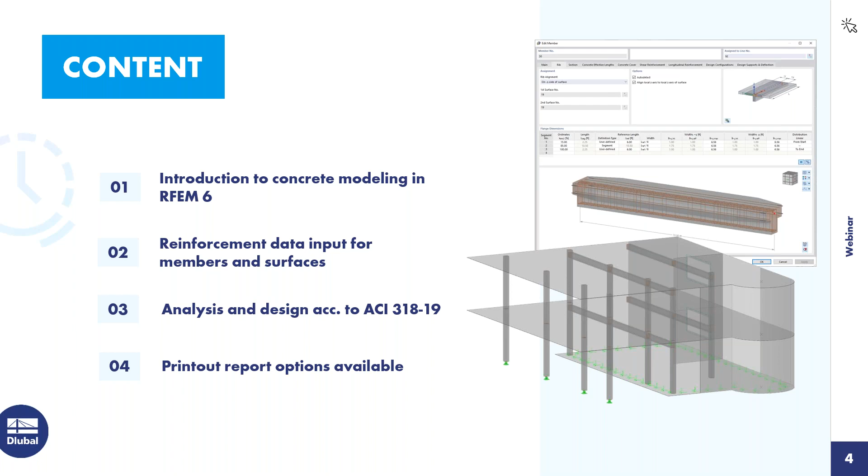As far as the content over the next hour today, we're going to move through a couple of examples, and we'll be working in our new FEA program, RFEM 6, as well as utilizing the concrete design add-on. So I'll give you a quick introduction to concrete modeling within our program. We'll take a look at reinforcement data input for both members and surfaces. We will be running an analysis and of course design according to the ACI 318. And finally, at the end, I'll show you a few printout report options that are available within the new program.

So we'll actually begin immediately within RFEM with our first example. So when we begin a new file, we want to give it a model name. The type of model is set to 3D. On the second tab, you'll notice here are all of our add-ons. So these add-ons would only be available if you've purchased them. And today we'll be focusing on the concrete design. You can see I've activated it here.

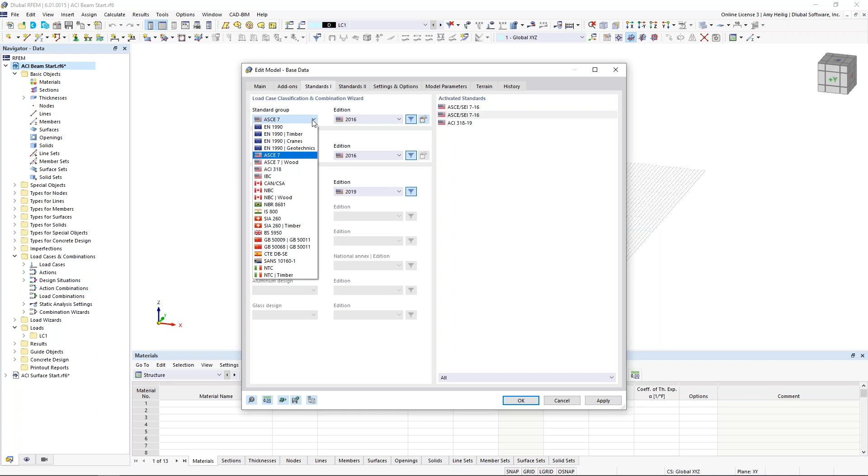Under the third tab, standards, this is where we can select the relevant concrete standards since we've activated that add-on. Today we'll be working with the ACI 318, but you can see here the Canadian standard, the Eurocode, and other international standards are available. As far as our load cases and combinations, we'll be working with the ASCE 7, but of course we can use our drop-down to select a different standard there. And finally, under the settings and options, this is where I can orient my global and local axes. You can see I've set both of these Z axes to upward for the model here.

So once we are done defining this basic information, we are brought into the main program RFEM here. And we want to start off with our drawing grid, which we can right click at the grid down at the bottom to edit this. You can see that I have my grid point spacing set at 1 foot. If you have anything else here, you can either reset it or you can choose this option here, default. That will move it back to 1 foot on spacing.

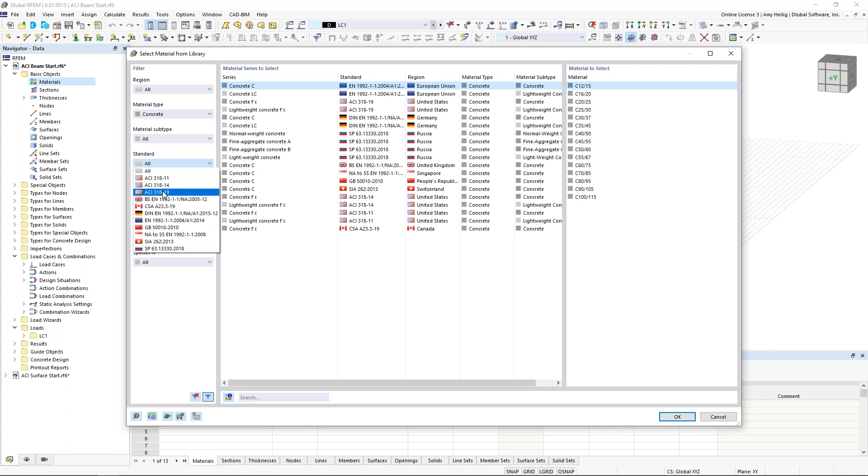We want to begin by defining a new material here. So we will right click within our navigator under the material to create a new material. This will bring open our dialog box within the program. We can then access our material database and we'll take advantage of the filters over here on the left. So you can see within my drop-down, I can choose concrete, I can select the standard ACI 318-19, and from here I can choose my 4000 psi concrete.

Notice on the second tab here with this concrete material, we also have the settings for creep and shrinkage. This comes into play a little bit later on with the serviceability design for long-term deflection if we wanted to consider that. We'll go ahead and leave this unchecked for our example today.

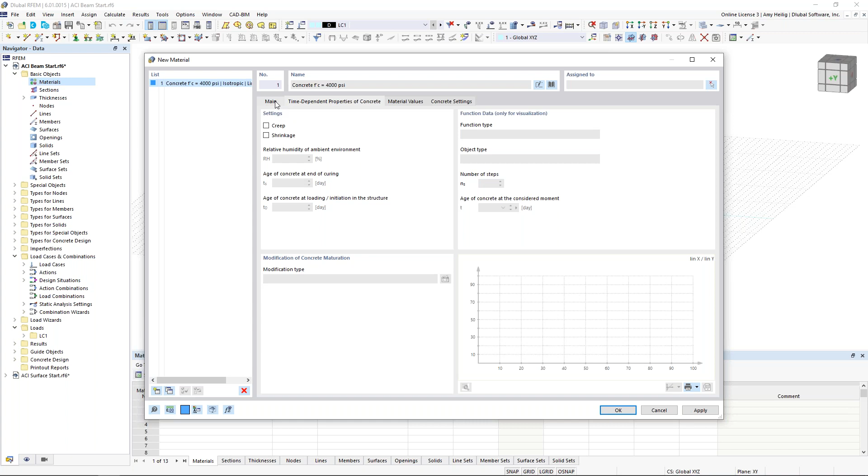Now, while we're still in this dialog box, we want to create a second material. So we once again visit our material database, and over on the left, we use our filters to reinforcing steel. Again, selecting the ACI 318, we can now choose grade 60. So this is a little bit different in RFEM 6 than what we saw previously in RFEM 5, where we do want to go ahead and define that reinforcing material here for our concrete elements. Once those materials are defined, we'll see them over here within the navigator tree. Now we want to do the same thing for our first cross section.

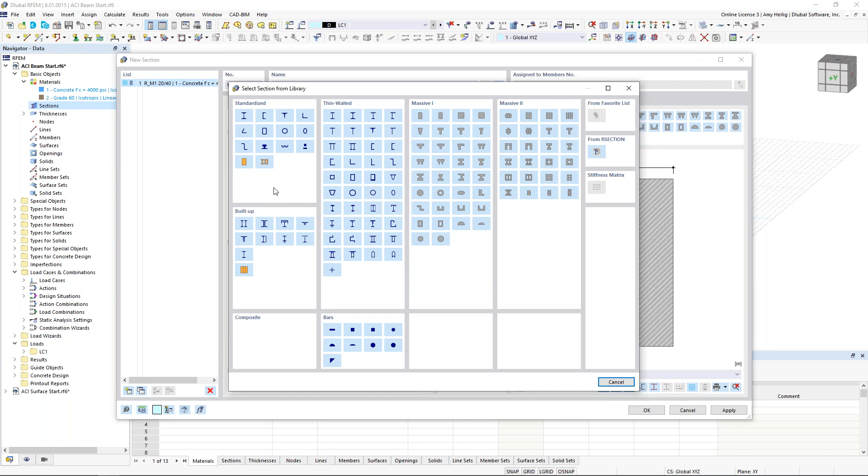So I can right click on the section here, go ahead and choose new section. And we'll see some of the various massive shapes available to us on the right. We can always visit our database here to choose from the library the various thin-walled and massive cross sections. We also have all of the available sections from the steel standards, aluminum, and so on.

But sticking with this basic rectangular section, under the second tab here is where we can go ahead and modify these dimensions at 12 by 18. The third tab will, of course, calculate all of the cross-section properties for us automatically. So we click OK, and now this section is available to us, and we want to begin by drawing our first member. So I can go up here to my toolbar to draw a new single member.

And what you'll see here is the member type is set to beam. Now notice the design properties is automatically checked on here. This is all related to that concrete design add-on that we activated within the base data. When we have this unchecked, notice all of these tabs disappear up here at the top related to our reinforcement. We will only perform an analysis if this option is not checked. But of course, we're also interested in the design portion for our example today. So we'll go ahead and leave this turned on.

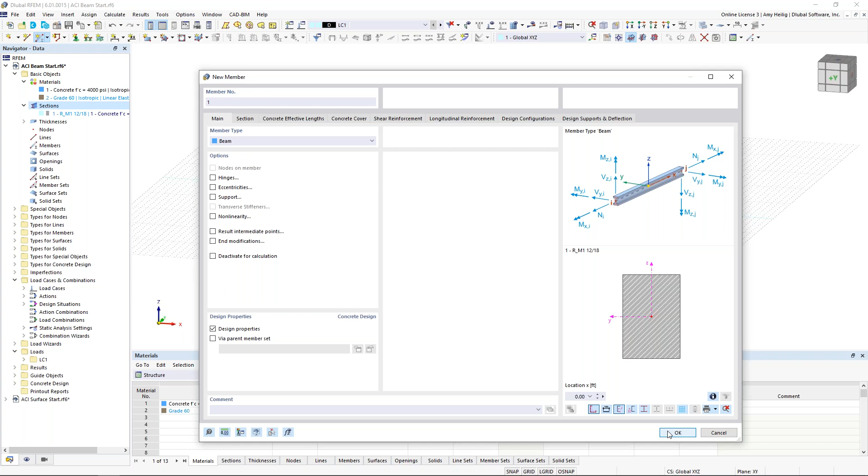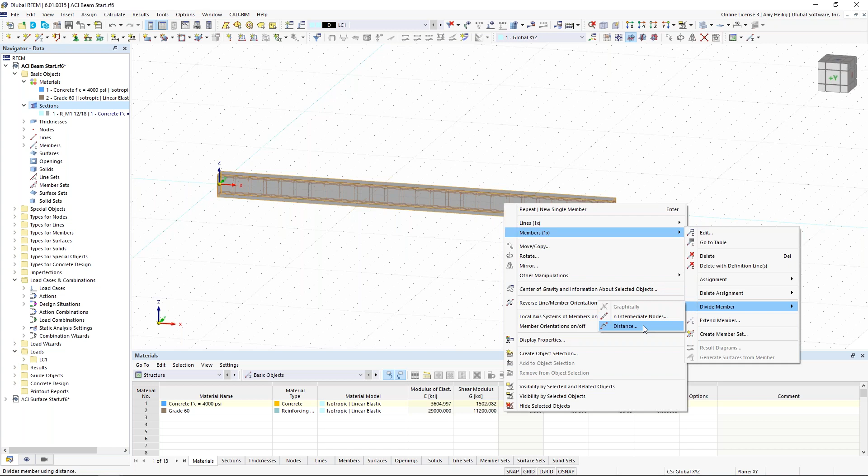We'll get back to some of these various tabs here in just a minute, but starting with the basic geometry here, I'm going to snap from my point 0, 0, 0, and my second point will be at 26, 0, 0. So we have our first beam element shown here. Now I want to add a node along the member length here. So I'll right click on the member, and under members, we have the option here to divide the member by a distance. Within this dialog box, I can tell the program to go ahead and place that intermediate node 20 feet from the member start.

But rather than dividing the member itself, I can choose this option down here to actually create the node without dividing it. So it will remain one continuous segment. I click OK. I can turn this into wireframe view, maybe turn off my grid. I can zoom in here and you'll see this node added along the member length.

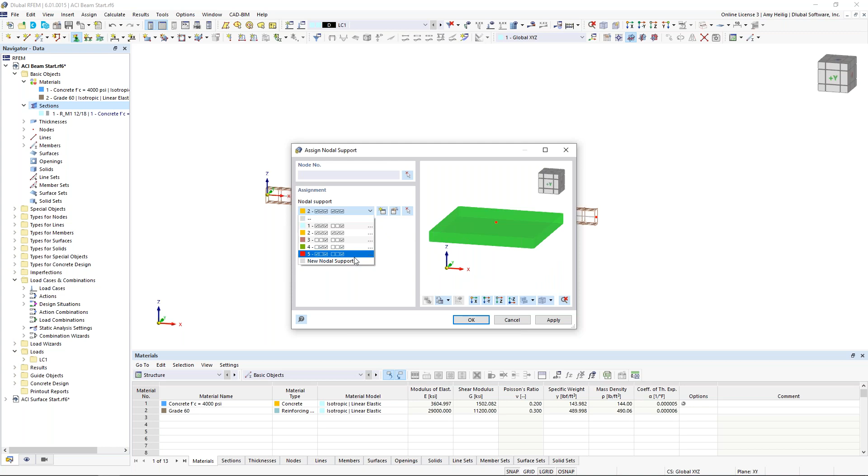So let us continue on by supporting this simple beam. So we'll go up to draw a new nodal support. And we have some default options within the program here, such as a typical pin support, maybe a typical rigid. We can also create a new support definition. So within this dialog box, we have our 6 degrees of freedom, 3 in translation, 3 in rotation. Now we also have partial fixity. So if we have something that's not fully fixed, not fully released, we can go ahead and define that spring constant there. And lastly, because RFEM is a nonlinear program, we can define these geometric nonlinearities for the nodal supports within our third drop-down box here.

For our first nodal support, we want to restrain the rotation about the global x-axis, which I can see back here in the background. I click OK for that first definition type, and then I can graphically select my node here, node number 1. Now notice I'm still within this dialog box. I can click Apply, and I can create a new nodal definition once more. This time we're going to release the translation in the global x direction for a roller. I click OK. I can graphically select my intermediate node here, and I click OK once again, and now our nodal supports are shown here at both these nodes.

Now, something new that we've added within RFEM 6, you can always right-click at one of these nodes and take advantage of this slider option to increase or decrease the size of those nodal supports.

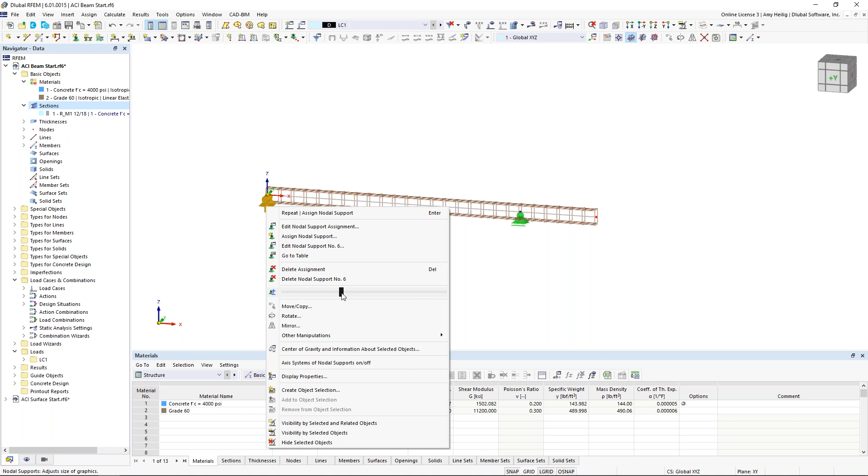Okay, so now that we have the basic geometry defined, let us move on to loading. Now notice the program has already created one default load case here. So if we go into this option, Edit Active Load Case, we can go ahead and rename the load case Dead. Now the self-weight is automatically activated here. The action category is set according to the ASCE 7 to dead load. So for our second load case, we will create this as Live 1. The action category will be set to live. The self-weight will be automatically unchecked here because we don't want to account for it twice.

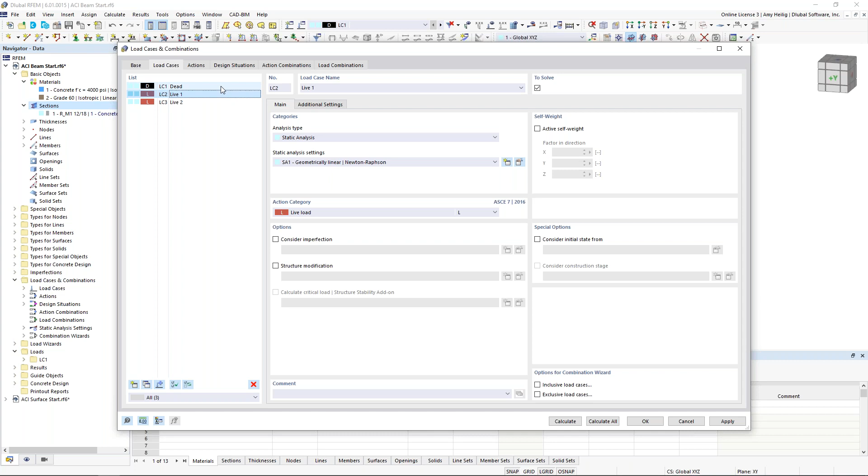And finally, for my third load case, I will make a copy and we'll just simply rename this one Live 2. So now that all 3 of our load cases are defined, I want to take a step back here under the first tab, Base. We will generate those load combinations automatically according to the ASCE 7.

Remember, this is what we set under our base data, but we can go ahead and make a change to a different standard here. I also like to activate this option, the combination names according to the action category. Under the actions, we have both dead load and live load defined. Because we have 2 live loads under our load cases, we need to tell the program how to combine these within the load combinations, whether that's together or separately or alternatively. So we can choose those options from the drop-down box here.

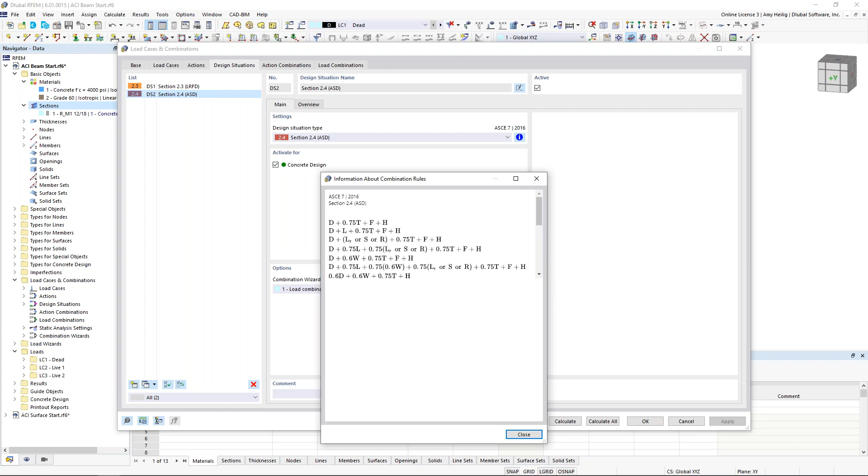Then we have our design situations, and this is new within RFEM 6. So we have 2 design situations created, and these will be used for our concrete design. Notice we have LRFD for our factored load combinations and ASD for our unfactored load combinations. Both of them are active here for the concrete design add-on. Now, if we're curious to see what these load combinations look like, referencing the standard, we can click on this little info button here, and now we can see all of the load combinations in detail.

But there's something that we need to also take care of within this combination wizard here that's important for concrete design. And for our factored load combinations, which will eventually be used for our strength limit state design, we know that we need to apply this I crack factor that comes directly from the standard to reduce the stiffness. And that's all done here within the combination wizard. So I can go to the edit settings here. And notice the static analysis settings is set to a second order analysis with P-delta considered, which is great. That's exactly what we're going to be utilizing today.

But we also want to turn on this option down here to consider the structure modification. Now I need to create a new structure modification. I'll activate this for members since I only have one member in my simple model. And within my tab that appears here, I need to use the drop-down box to create a new member stiffness modification. And sure enough, within this drop-down box, we see here the ACI 318 Table 6.6.3.1.1(a) listed. This is just going to reference the code to give you the I crack factors for the various component types here. And for today, we obviously have a beam. So the I crack factor of 0.35 will be applied to the bending stiffness here.

So I can click OK here, and then I'm going to want to either type in my member number or I can graphically select it. I click OK, and now for my factored load combinations, the I crack factor will automatically be considered. But when we're talking about our unfactored load combinations for serviceability design, we do not want to apply that I crack factor stiffness reduction. Rather, what we reference here from the code is the effective moment of inertia, I sub e, from Table 24.2.3.5. So we actually need to deactivate that I crack factor here.

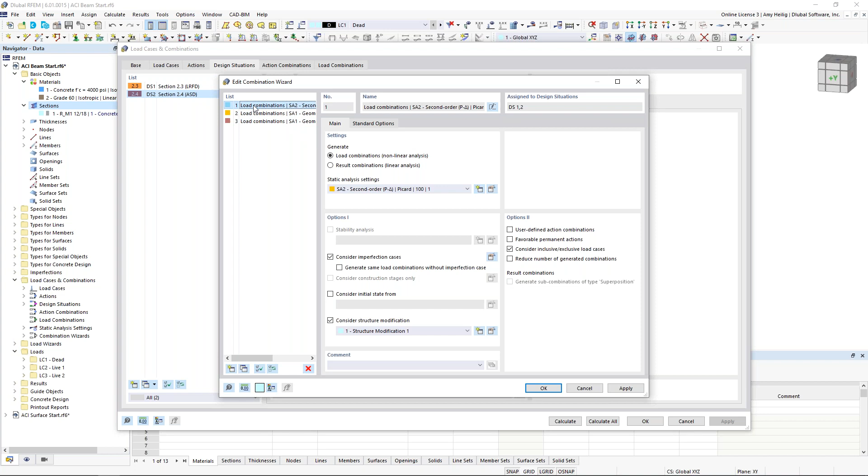Well, that's easy enough. If I go into my combination wizards and create a new definition here. So previously for my factored load combinations, I was using item number 1 here with my structure modifications active. Now for my third one that I just created, we want to choose a second order analysis according to P-delta, but I will actually leave this turned off. The concrete design add-on will go ahead and determine the effective moment of inertia I sub e for deflection calculations automatically. So nothing needs to be done here with serviceability or deflections for the ASD design situation. We just simply need to deactivate those settings here under that third definition.

So now under the load combinations, we can see here our factored load combinations in orange, and notice the structure modification, that I crack factor, is applied to these. Our unfactored load combinations here in red, this setting is turned off.

So now that we have defined the load cases and combinations, we need to actually apply the load to the member. So we'll start off with a new member load within our toolbar here. The program asks us which load case to place this member load under. We'll choose dead load. And up pops our dialog box where we can simply define the load magnitude of negative 1.0 kip per foot.

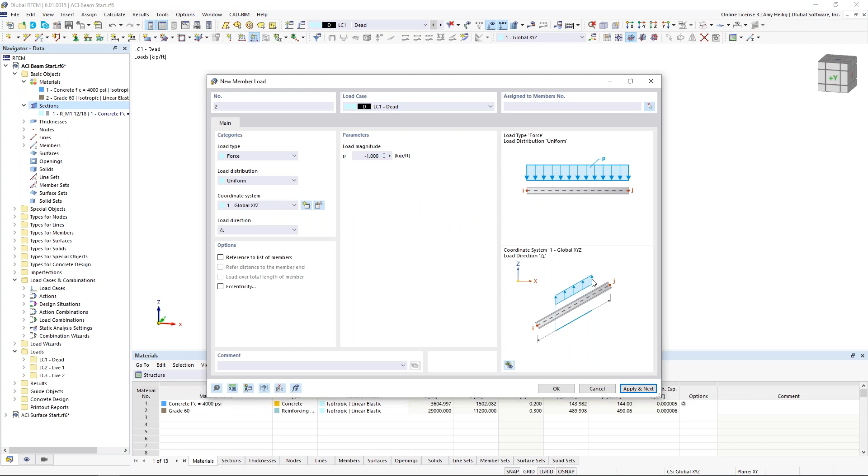And this will be applied along the full length of the member. I can graphically choose this member or type in member number 1. I hit apply and next, and notice in the background that load was applied, but I'm still within this dialog box.

What this allows me to do then is to drop down to load case number 2. I'm going to change the load distribution here to trapezoidal, and adjust my load magnitude at the start to negative 0.2. The end will also be negative 0.2, but I want to make sure to apply this only from point 0 to 20 feet on my beam. I type in member number 1, apply and next, and in the background we should see that live load applied only between our 2 nodal supports.

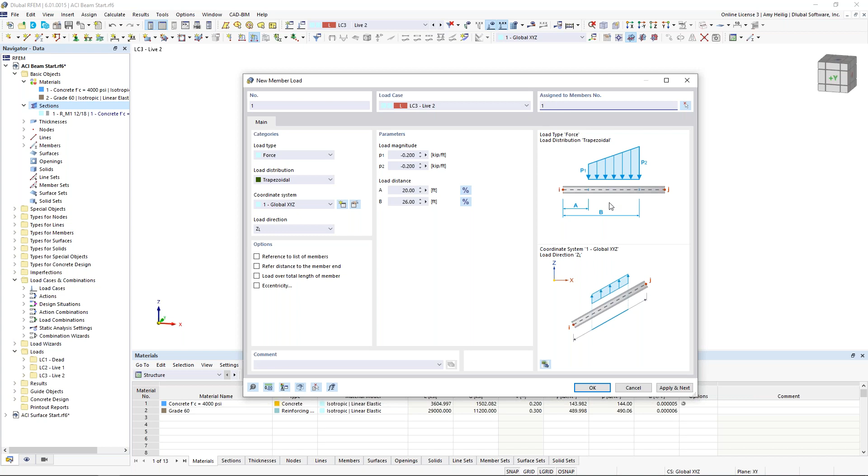Finally, we want to do the same thing with load case number 3. We're going to leave the load magnitude the same, but adjust this to 20 feet and then to 26 feet. We go ahead and hit member number 1 here on our keyboard, click OK, and now we should see that additional live load defined. Now within my drop-down box, I have the ability to cycle through these different load cases and combinations to view the loads applied to my beam, also including the load factors from ASCE 7.

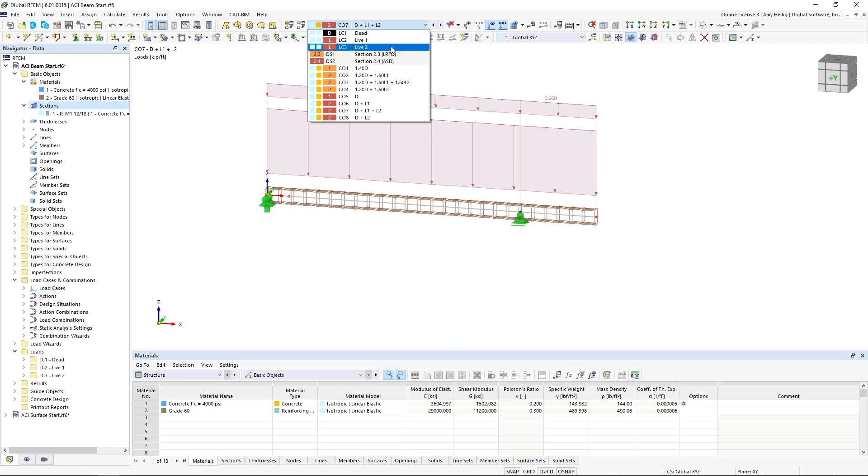Okay, so what we can do now is to choose this LRFD design situation, and I can run a quick analysis. Remember, I haven't modified my reinforcement yet, so I'm not really doing the design according to the ACI yet. The program put in some default reinforcement to begin with. But looking at just these static analysis results, notice we have a new tab here within our navigator, and it's grayed out because it's the only thing we've solved for, but it says static analysis.

Now we're probably not so interested in the global deformations for these factored load combinations, but what we can take a look at are topics like internal forces. You can think of these design situations as an envelope solution. It's going to group together all of those factored load combinations, and what you'll see here are 2 different values for all of my internal forces.

These 2 different values just refer to the envelope values. Currently I'm viewing both the max and min, but I can set this to only the max or only the min, and we'll see that adjust graphically. We also can display the support reactions. Again, these are just the internal forces. This is probably what we'd want to use to do our design according to the ACI.

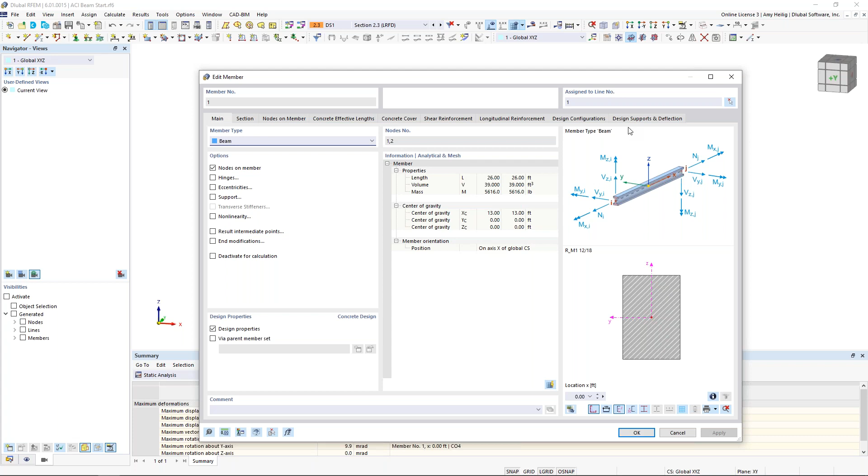So moving on to that topic, let us double click on this member to explore these other tabs located at the top for our reinforcement definition. The first tab is the concrete effective lengths. I'm not going to touch anything within this tab. The reason why is because when we do not do anything within this tab, it is going to design the member according to a P-delta analysis. That is one of the approved methods within the ACI standard.

Now, alternatively, if I do define an effective length within this drop-down box, it will design according to the moment magnification method. Again, this is also from Chapter 6, an approved method. But we'll go ahead and design according to P-delta today. Therefore, under our concrete cover, we can leave this as 1.5 inches, which is default here.

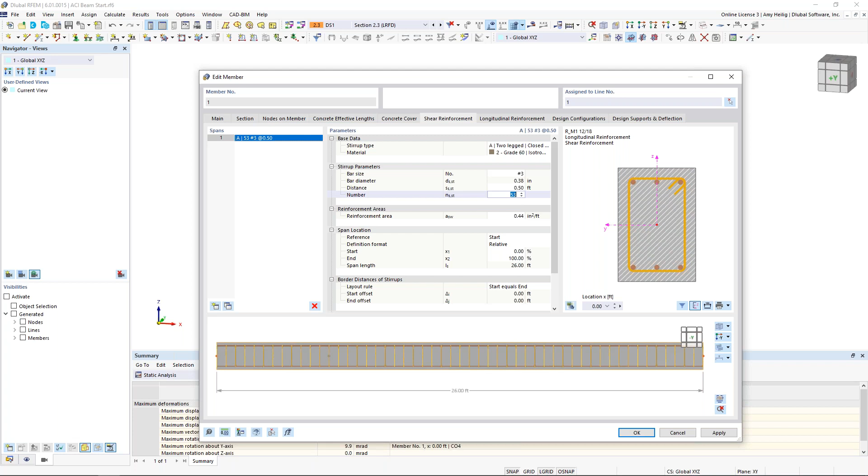Our shear reinforcement allows me to define different zones if I want along the member length. So notice I can create these different zones here and adjust my shear reinforcement as needed. Now, for our example today, we'll go ahead and utilize these number 3s, but I'm going to modify my spacing at 0.5 feet, or every 6 inches. Notice this picture down here automatically updates with my shear reinforcement. Now this is applied along the full member length.

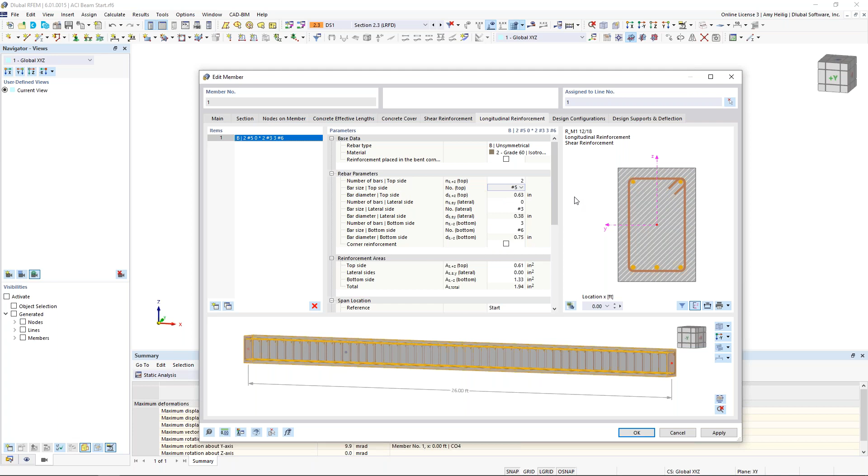Under my longitudinal reinforcement, this is where I'm going to set the longitudinal reinforcement as shown over here in this graphic, this cross section. I can use my drop-down box to choose unsymmetrical. This option now gives me the ability to define 2 number 5 bars at the top of my beam. We can see that picture update here. Along the sides, I'd like to define 1 number 4. Again, seeing those lateral bars here, go ahead and update in the picture.

And then finally, we want to update the bottom. We'll go ahead and choose 5 number 5s from the drop-down box here, and we see those 5 number 5s shown within the cross section. This is going to be applied along the full length of the member here.

What else we can do is define a little bit more information, such as reinforcement offset, but also anchorage type at the start and member end. This is all going to come into play for our development length design checks within the ACI, so we can make adjustments there. For now, I'll just leave this as empty.

Now, we of course have some additional positive bending moment in between these 2 supports. So perhaps this reinforcement isn't completely adequate, and we'd like to add some additional bottom reinforcement only at this location. So what we can do here is create a new item.

Up at the top, I'm going to choose from the drop-down box the option D line, then choose 4 number 6s. Then I want to adjust my offset distance, which is all measured directly from the stirrup. We can modify this at 0 and 1.7. And then for the right-hand side of this line reinforcement, it will be 0 and 1.7 again.

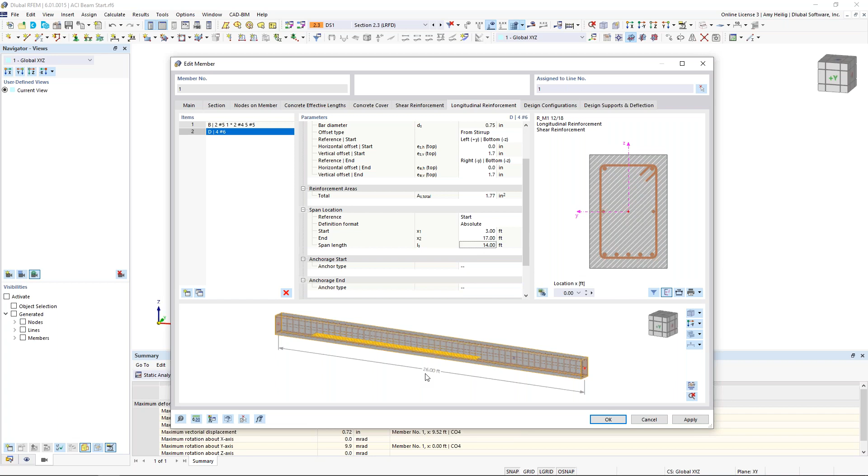Okay, so now we see that additional reinforcement, but right now it's shown along the entire length of the member. I'm going to modify this to begin at 3 feet and end at 17 feet. Now we can see the reinforcement shown here, which will coincide in between the two nodal supports.

Now, similarly, we probably have a negative bending moment over this intermediate support here and into the cantilever portion. So we'd like to add some additional reinforcement for the top of our member. Let us once again define here the option D for line, and we're going to choose here 2 number 5s.

Now, for this option with our offset distance, we want to use the drop-down box here to choose center, top, positive Z. Then I'm going to modify my offset distance to negative 1.2 and 0. I'll choose the same option, center, top, positive Z, and this is going to be 1.2 and 0. So now we can see that additional reinforcement at the top shown here.

Now we don't want to run this along the entire member length. Rather, we are going to choose a distance here of 17 feet to 25.5. Now we have the additional top reinforcement defined over that intermediate support. So that will be all that's needed for this particular tab.

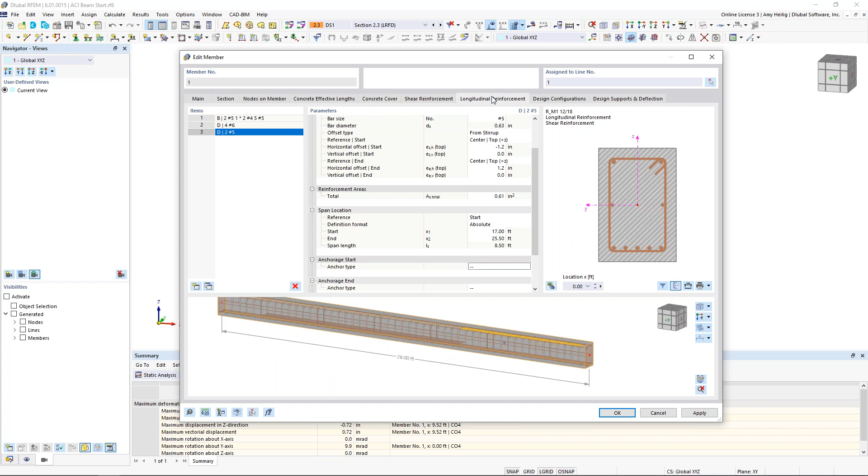So we'll move on to design configuration. We have strength configuration and serviceability, both of which come with a default option. We can go ahead and edit the settings for this default.

What you're going to see here are just the various options specifically for the ACI on what we can turn on and off for the strength limit state. For example, we're going to see strength reduction factors, some minimums and maximums to consider directly from the standard. Now the stability tab here is related to the moment magnification method. We're not running that for today, so nothing to take care of here.

As far as the serviceability configurations, if we take a look at this, you'll notice initially we're going to be checking the crack analysis. So this is going to allow us to take into consideration section 24.3.2 from the ACI to make sure that our spacing of our longitudinal reinforcement meets the code requirements.

Now, additionally, we can turn on the direct crack width calculation. This is a bit more of a theoretical approach; it will utilize the Gergely-Lutz equation to calculate the crack width. We can compare this to the reasonable crack widths set forth by the ACI PRC 224. Directly from that standard, we have some different options here that allow us to choose our limiting crack width. For example, dry air protective membrane, we can set this to 0.016 inches.

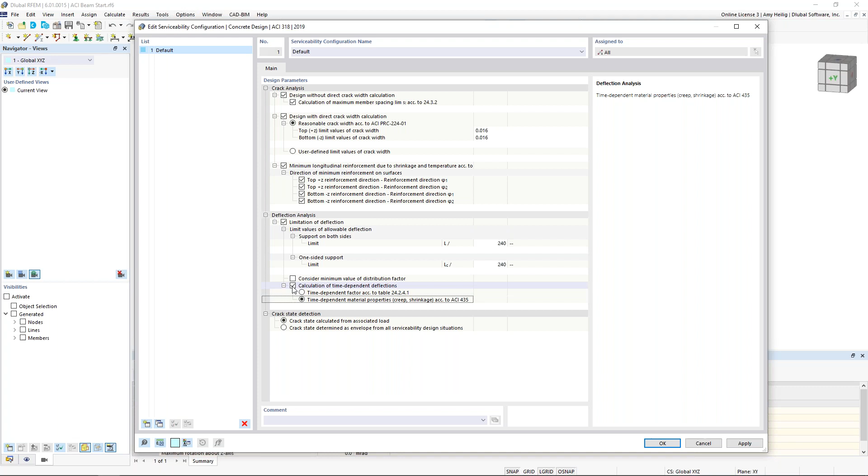Alternatively, we can consider creep and shrinkage here according to ACI 435. Remember, I showed you the material properties themselves allow you to define those creep and shrinkage properties. We'll go ahead and turn that off for today. We won't be considering long-term deflection, and we are done with the configurations here.

Now, the final tab is related to our design supports, and this is important for two different reasons. The first we'll start with is deflections. The program doesn't know which portion is supported on both ends and which end is a cantilever. So by defining these design supports, that gives the program the intelligence to recognize which limiting deflection ratio to compare the different segments to.

What we'll begin with is a new design support at the left-hand side. So I create this new design support. You'll notice the type is set to concrete. We give it a support width of 16 inches. The support depth is just set to the width of the member. We have a nice picture over here on the right-hand side, just referencing what some of these settings are.

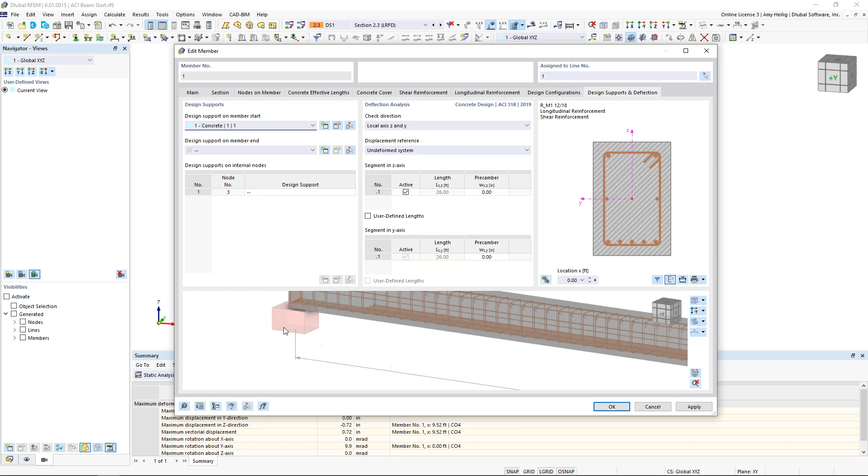Now we also have the ability here to reduce the moment, so we can set this factor for moment redistribution over this support width. This is all related to ACI section 6.6.5. So when we create that support width, we can automatically see it set here on the first node of our beam.

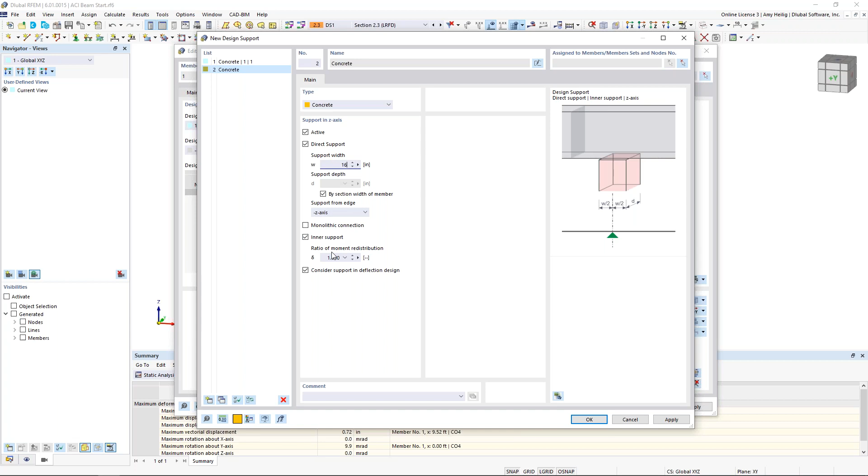Now we also want to set that design support on the intermediate node along the member length. We can do so here at node number 3 by either selecting the support we already defined, or we can create a new definition. This one will also be 16 inches in width, but I want to set my ratio here, maybe 0.75. I click OK, and now we can see that nice design support shown here.

So now the program will have the intelligence to recognize this is a cantilever portion out here on the right, and this portion here is supported on both sides. Now, if you do not set any design supports within this tab at all, the program automatically defaults to a support at the member start and the member end internally.

Now, these design supports are also important for a second reason, and this comes down to strength design when we're talking about topics like taking the shear internal force a distance d away from the support face. Well, this will all be considered now with these design supports that we've defined. Otherwise, the program only knows the intelligence of taking the shear force, for example, a distance d away from the member start.

The information over here on the right is just related to the serviceability deflection checks. We can add in a pre-camber. We want to tell the program what is the reference length for our limiting deflection ratios, and that will sum up this particular tab here.

Okay, so now that we have finished all of these various settings, notice that the program has automatically updated my reinforcement. We can see those design supports shown here, and we can now move on to the design utilizing the concrete add-on. So within my table down at the bottom, I'm going to activate the concrete design here. This is available because I have set this under the base data to turn on that concrete design add-on.

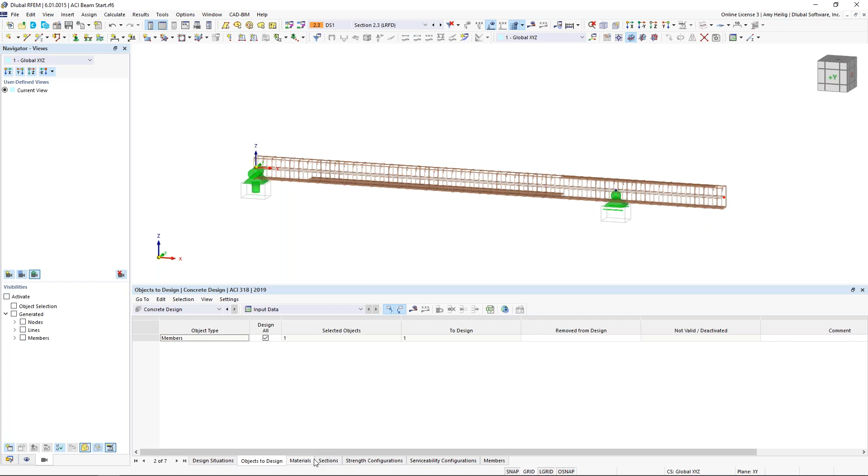Now the objects to design, we can see here we only have one element in the model, of course. The rest of these tabs are really just repetitive. It tells us our materials, our sections, so nothing to really do here. So we can begin by running our calculation directly within this table.

Now notice that the program will run through our load combinations here, and it's also running through the design portion. It solves pretty quickly, and we can see now we are presented with our results. So we're still within this concrete design add-on, and now within the drop-down box, I can look at my design ratios on my members. And here they are grouped together quite nice, showing the strength design, the serviceability, the reinforcing limits, and the detailing of the reinforcement.

All of the design ratios here are green. That's always a good sign rather than seeing red, which means we're over the design ratio of 1.0. We can also utilize these filters up here at the top. If we wanted to view maybe only the max ratio, we can select the max here. Otherwise, all of them will be shown. Now notice as I click through this, the big red arrow showing in this graphical interface here will determine where my controlling internal force is.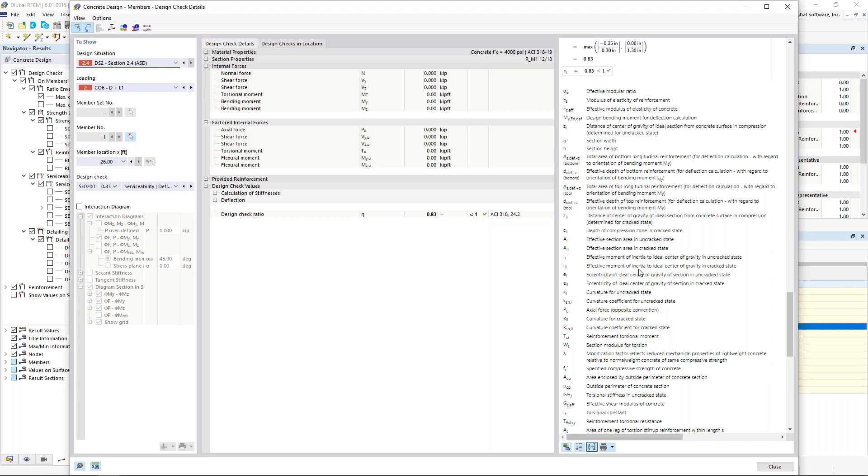The other new thing within RFEM 6, for any one of these design ratio checks, what I can do here is to visit my design check details. So this is going to launch this dialog box that is going to show all of my code equations here. So notice this one is pretty long and complex, but we show every single equation. Down at the bottom, we're going to give you every variable definition. We're also giving you all of the code references along the side as well.

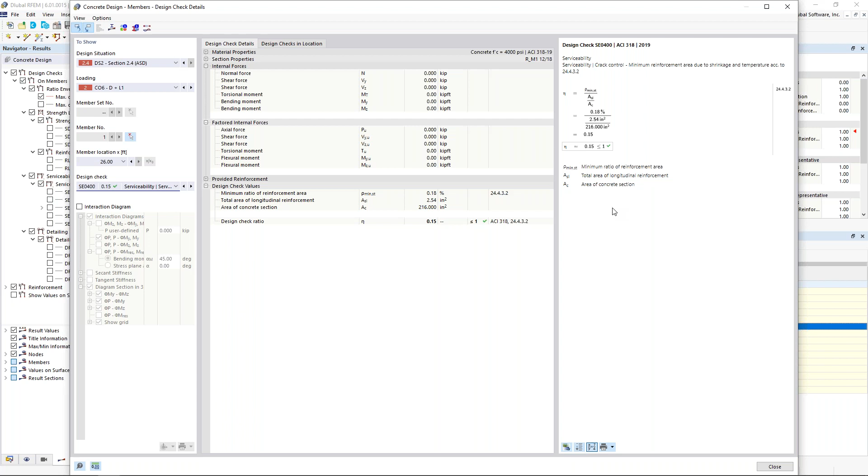So we can use any one of these checks here. Currently, we're looking at serviceability. We can take a look at any one of these other checks to determine the ratio here for our other various serviceability checks. Now, alternatively, we can take a look at any one of the strength design checks as well. Same concept. We're going to see all of those variables listed again with all of the code references.

What else is pretty powerful is we can view the diagram in section. And this is showing me which portions of this concrete section here are in compression, which are in tension, and we're also giving you the stresses for each of the rebar here. So this information is all available to us, of course, in our table format, but now we have this new drop down here for concrete design. And we can see if we collapse these trees that we have two options here, the design checks or the reinforcement. So let us take a look at the design checks first.

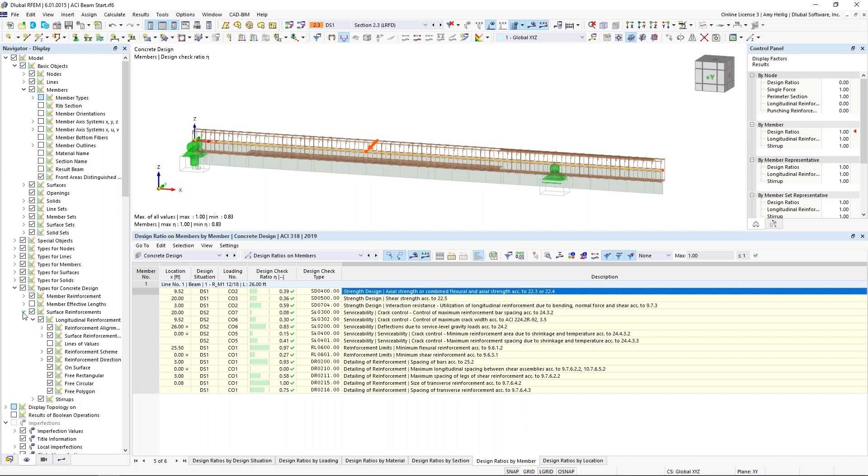Also, I can turn off my reinforcement on my member by visiting my navigator display options. And here we'll see types for concrete design, and I can turn off my member reinforcement. So going back to my member design check results here, I can turn off maybe the max ratio and turn on any of the various checks related to my color coding here, which all relate back to the table design ratios.

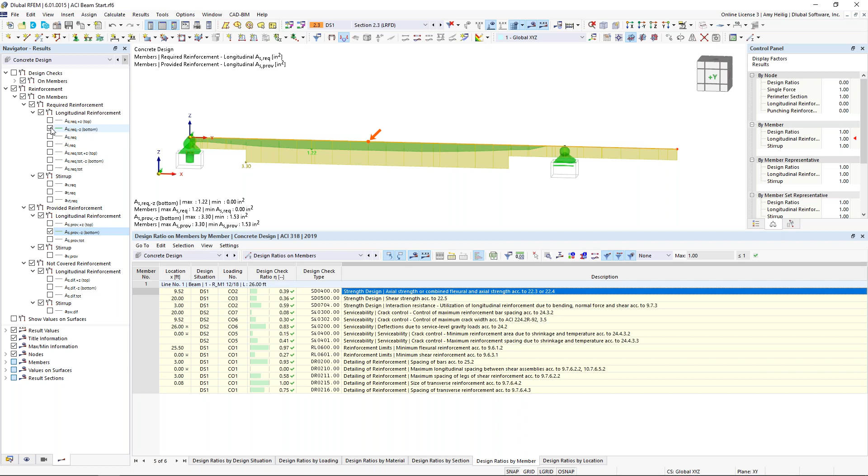Now, in addition to viewing the design checks, we also can take a look at the reinforcement along the member. And what I mean by this is we can view the required reinforcement at the bottom of the member. This is strictly from the analysis. Well, on top of this, what we can do is to overlay the provided reinforcement on the bottom. So what we would always hope to see, of course, is that the provided reinforcement is greater than the required reinforcement.

And in a similar fashion, we can turn on the required reinforcement for the top, which makes sense. We see it over here along the support and into the cantilever. What we can do is to overlay the provided reinforcement at the top. And again, this is greater than the required. So some various options there in terms of how to graphically view these concrete design results, both in table format as well as within the graphical options.

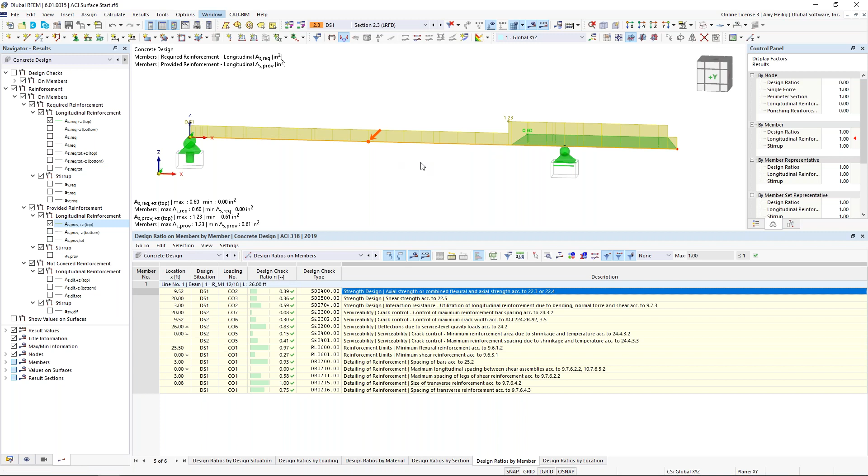So that will go ahead and wrap up our first example here. I wanted to give you an introduction to just a simple beam design. For our second example, let us move into a little bit more of a complex structure. So now we have an entire building here. We have columns, beams, walls, and slabs all defined with reinforced concrete. Now, the first thing is I've already set up the load combinations, taking care of a lot of this information that we just did with example 1. Let us go into our design situations that we already covered.

So again, we have LRFD and ASD, and as we mentioned before, we need to set those I crack factors for our factored load combinations for the strength design. Well, I went ahead and did so. I just want to show you guys how this differs a little bit when looking at the structure modification here.

Now you'll notice I've activated both members and surfaces. We have two tabs up at the top, and I have set the I crack factor for my columns. I've selected all of the column members here. I also see my beams, and I've selected all my beam members. And under my surfaces, we have set the I crack factor according to the ACI for walls uncracked and flat plates and flat slabs.

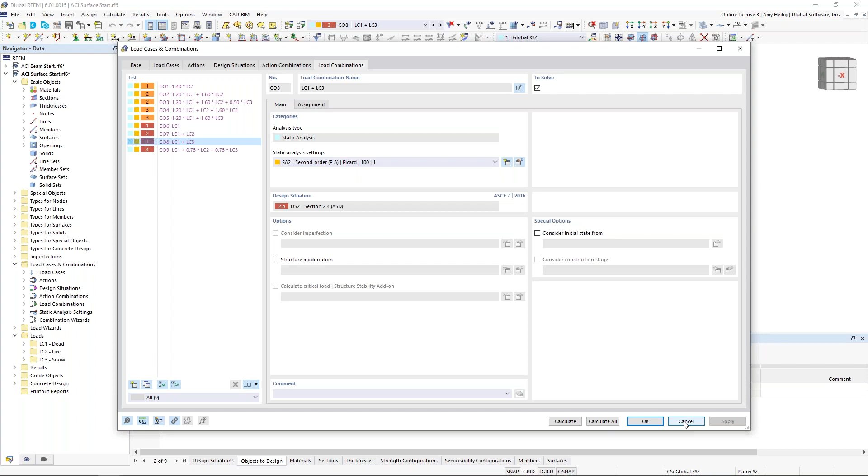Now, just to go into these detail settings, I also wanted to mention that in a similar manner, we have the Canadian standard here. It's the same concept for designing according to the CSA standard, so that option is also available here. Okay, so now that we have defined these structure modifications for our factored load combinations, I created an additional combination wizard for my unfactored load combinations, which should not have any stiffness reductions. So we'll see that reflected here within our load combinations, just like what we saw with example 1, but now we have many more elements.

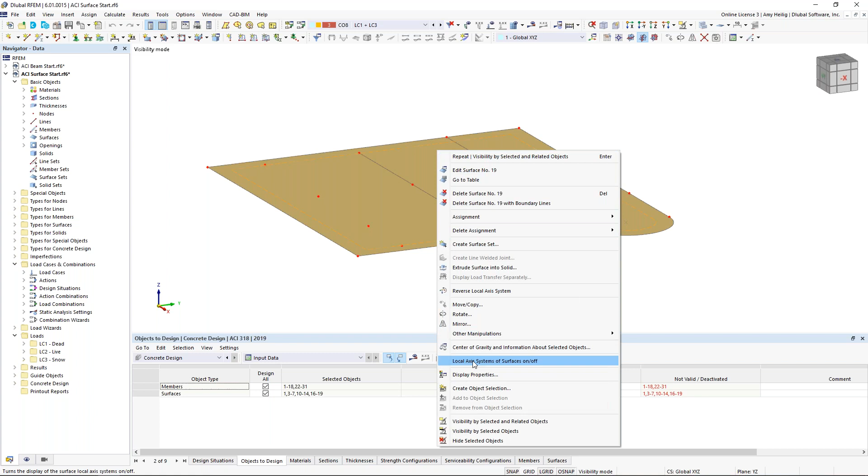So let us begin with the reinforcement definition for our first surface. And we'll choose this slab located here in the center. And I will go ahead and create a visibility by the selected objects. I'm also going to right click on this surface and I'm going to turn on the local axis system. Turn this to wireframe view as well. The local axes are important for the reinforcement directions, which we'll see in just a minute. So I wanted to go ahead and set us up for that.

So all we need to do is to double click on the surface here. Now, just like with the members, with the design properties turned off, which is the case with every single element within this model right now, we're only running the analysis. But when I activate the design properties, we see all of our additional tabs here where we can define our reinforcement for the design. So let us move to the concrete cover. And we'll begin by defining a new concrete cover of 0.75, just referencing table 20.5.1.3.1 from the ACI. Sorry about that.

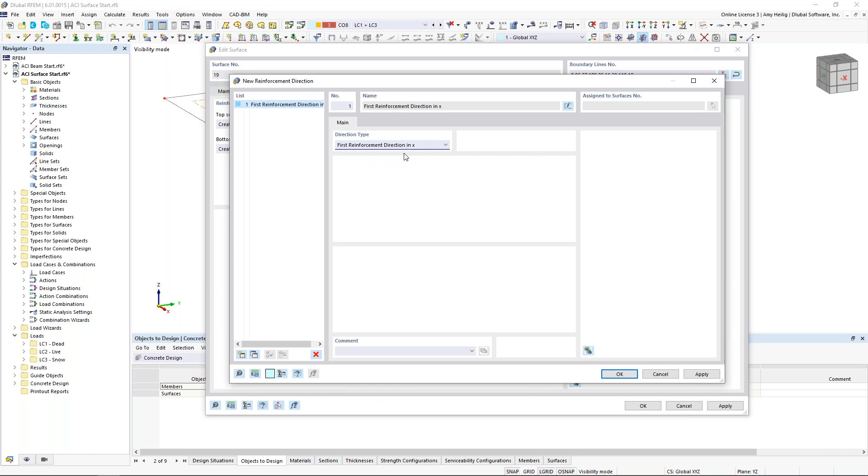Okay, now the concrete design properties. This is going to be where we set our reinforcement direction. We have no reinforcement direction defined right now, so let's create a new one. The reinforcement direction is going to be related either to the local x-axis or the local y-axis of the surface. So this is why I wanted to turn on the local axes so you can understand how the reinforcement direction is influenced by this. We'll begin with the local direction x for the top side as well as the bottom side. So we're utilizing the direction based on the local x-axis, and the transverse direction would be the local y-axis. Now, of course, you can rotate this too. It doesn't necessarily have to be in either one of those orthogonal directions.

For the surface reinforcement, we create a new definition here. And we're going to apply the reinforcement over the entire surface. My reinforcement material is already set at grade 60. The reinforcement type can be welded wire mesh, we have the library in there, it can be rebars or it can be stirrups. So perhaps we want to define some additional shear reinforcement around our columns, for example. But we'll go ahead and utilize the rebar option, and we will choose number 5s at 12 inches on center or 1 foot.

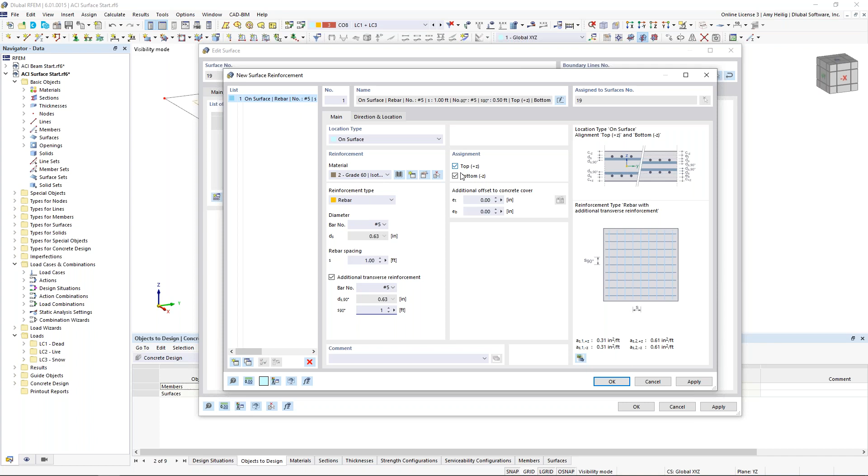Now, we also want to apply this in the transverse reinforcement direction. So notice right now it's only spanning one way. When we activate this, we want to choose number 5s, spanning 1 foot in the orthogonal direction here. So we see the picture update over here on the right. Now, we're applying this to both the top and bottom of the surface. So I've created this first definition type here. We can see it populate here within our table.

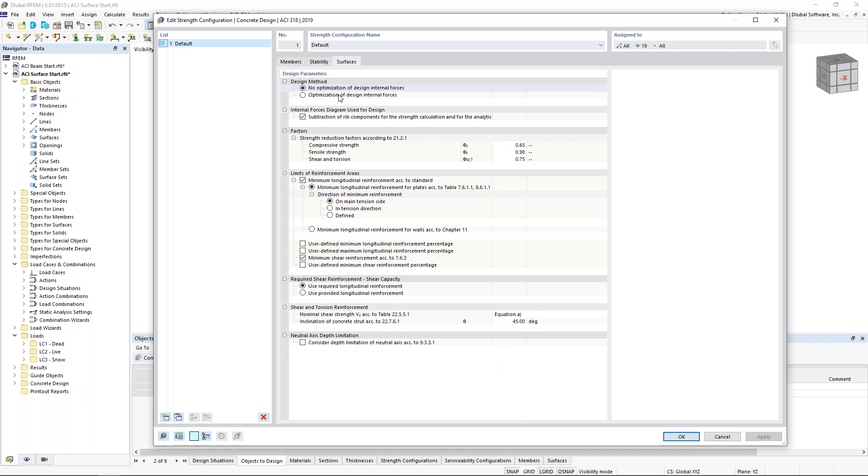Okay, so the design configurations, really same concept here of what we just talked about with our first example. Just notice that we now have an additional tab here for surfaces. So just some various settings specific to the ACI for our strength limit state design. Serviceability, same concept we've already discussed within the previous example, but just know that we can check deflections for surfaces as well.

So that limiting deflection ratio is still referenced here within this design configuration. Under the last tab, deflection, this is where we simply tell the program, is this surface supported on both ends or is it a cantilever? The reference length is determined by this dropdown where we can use the maximum boundary line of the surface, the minimum boundary line, or we can manually set that length as well.

So now that we have defined our surface reinforcement here, we can click OK, and we see this graphically update here with our number 5s at 12 inches on center. But if I go ahead and right click and show the hidden objects in the background, we know that we have these columns framing up into the slab here. So we're probably going to have some additional negative moment at these locations. So perhaps I'd like to add some additional top reinforcement, but only at these locations. We don't want to apply it to the entire surface.

So if we take a look back at our navigator here, we see the types for concrete design. And here's our surface reinforcement. That surface reinforcement number 5s at 12 inches on center is defined within this tree option. Well, I can right click to create a new surface reinforcement, and this dialog box should look familiar, but this time we're going to choose the option free rectangular. So here we can define additional rebar, and I'm going to choose again number 5s at 1 foot on center. And I'm going to also define the transverse reinforcement, number 5s at 1 foot on center. I only want to apply this to the top of the surface, not the bottom.

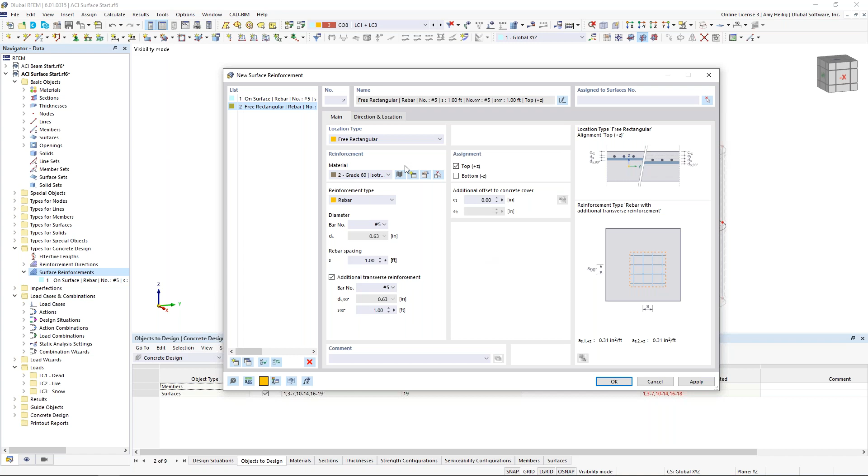Now, we could take this a step further and apply an additional offset here. So perhaps we wanted 2 layers of reinforcement within our concrete slab. If we do not define any offset, the program is simply going to apply this area at the same location as my previous surface reinforcement that we can see as item number 1 here. The direction and location tab, I'm going to choose the option center and sides of rectangle. This allows me to graphically choose my point here, and I'll choose the top of one of these columns, 18 and -11. I define the size of my rectangle, 6 feet by 6 feet. And then I can graphically choose my surface here I'd like to apply it to.

Now, this picture represents the fact that we can actually project down this reinforcement over multiple levels. So if we have a multi-level story concrete structure, and we know that this same free surface reinforcement should be applied at every single level, we can define multiple surfaces here, and the program will automatically place that at every story level. Okay, so once we click OK, we should see that additional reinforcement here.

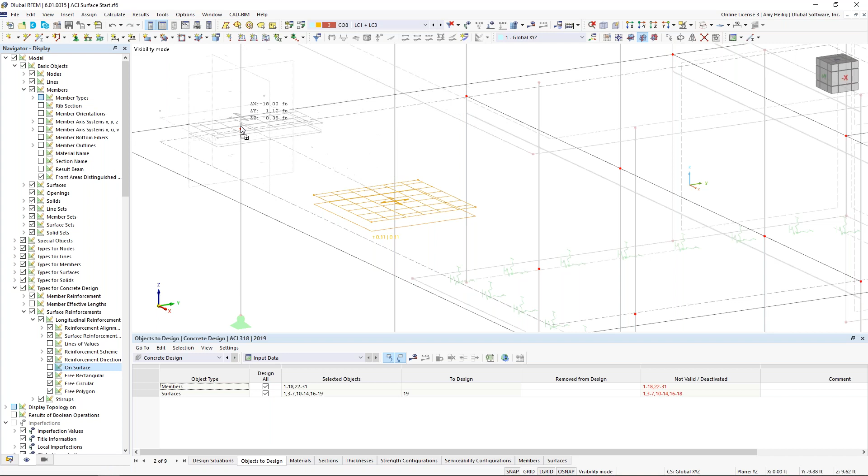Now, it might make a little bit more clear under our display navigator. I am going to turn off the surface reinforcement here on the surface itself, so we only see this rectangular surface defined here. Additionally, what I can do is to select this, hold down my control key, and actually just drag and drop it to different locations on my model that I know I'm going to have a little bit higher of a negative bending moment. I also have some areas back here where we kind of intersect with the walls and columns that need a little bit more reinforcement on the top. So of course we'd want to continue optimizing this best we can based on the internal forces. Again, we probably want to add some shear reinforcement and such to the slab.

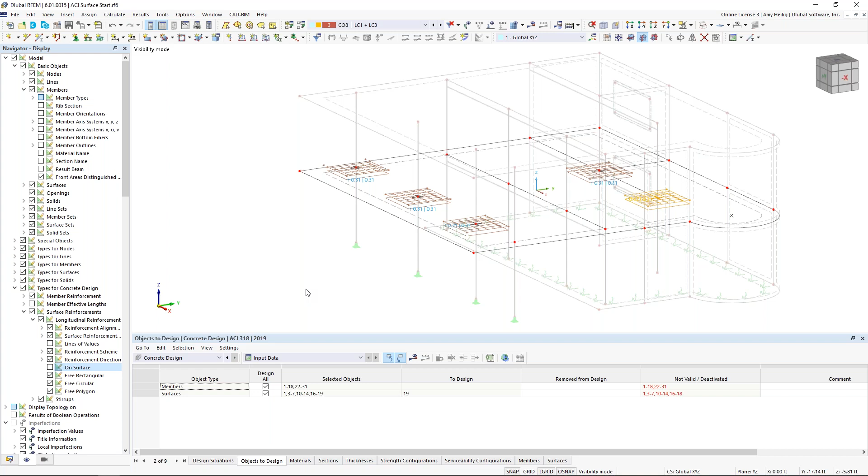Now, taking you to another little side note here, punching shear, this will be ready actually, hopefully in several weeks for the ACI. It wasn't quite ready for this presentation, so we're not checking that right now, but that should be very close to being done within the program.

So once we have defined our surface reinforcement, we can actually begin the design. But before we do, I'd like to define a little bit more reinforcement for some of these other elements within the structure. So let me turn off the free rectangular, and I will turn off the local axes of the surfaces, and I'll cancel this visibility mode and turn this back into the rendered building here. So notice we have these beam elements drop below the bottom of these slabs. Well, these are special members. If we double click on them, the member type is set to rib.

So what a rib element allows us to do is to actually design this as a T-beam, so integrating it into the slab directly. So what we do is define the rib alignment here on the -Z side of the surface. Now, what's new within RFEM 6 is that we allow you to vary the effective width or the flange dimensions along the length of the member.

So currently the default is just L/6 over the full length of the member. But what we can do here is to change this to maybe 85%, and we'll modify this to the segment, and we will set this to L/8 instead. Now from 85 to 100%, I'm going to use my definition type here to user defined. We will set this to 6 feet, and we will go ahead and select L/8 once again. So notice that the effective width transitions clearly here at 85% to a smaller value.

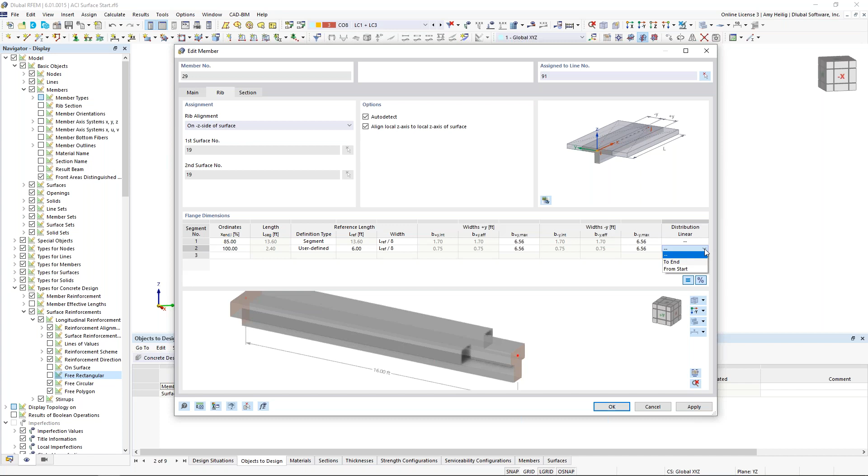Now, what else is new is that we have this option within the distribution linear column down here at the end to linearly distribute this to the end. So notice at 85% to 100%, we have a clear line transitioning back to the end of the member. So this is all done as we approach the interior column here. So that effective width is set for that rib member.

Now I went ahead and did it for the rest of these members. You'll notice here for this particular rib section, if we zoom in, we have this linear distribution at both ends as it spans between these interior columns. Maybe up at the top though, we want to also utilize these rib options, but for these, what I went ahead and did is just set these without using that distribution option down at the end. So we have a clear, distinct view here of where the effective width changes at 85%. So either are possible within the program.

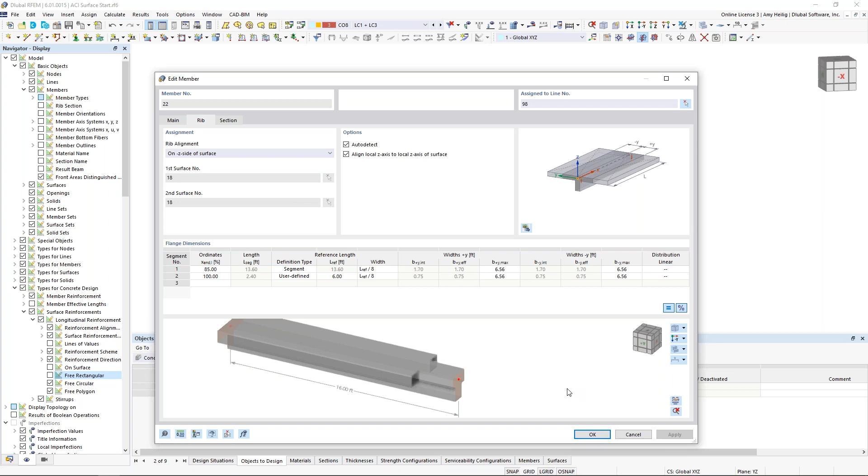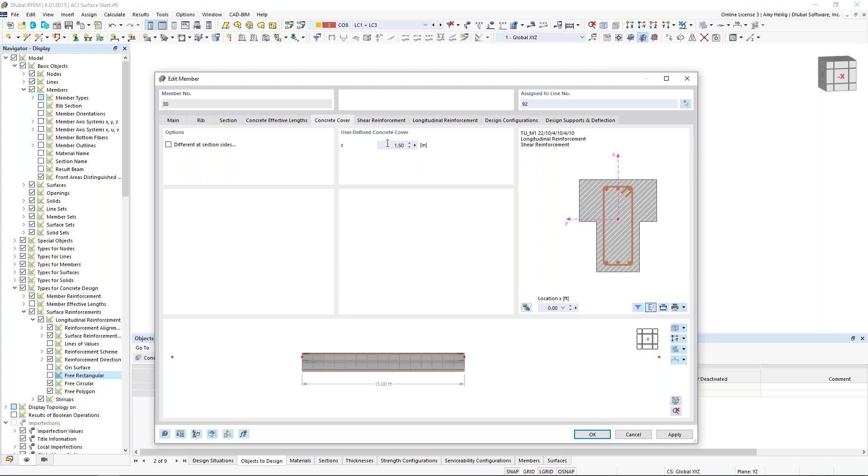So let us begin by designing this rib member here in the center of that lower level. Now remember, everything has been turned off for the design property, so we want to activate that now. And we are going to take a look at the concrete cover. Remember, the effective lengths we leave empty. We're not designing according to the moment magnification method, but rather P-delta. The concrete cover, we will leave this as default at 1.5 inches.

Now for my shear reinforcement, I actually do want to have 3 different zones here. So I can zoom in, and for my first zone of my shear reinforcement, we want to choose number 3s, but we'll go ahead and have a tighter spacing here of 4 inches or 0.33 feet. Now I want to modify the distance here of this zone so that this is applied from 0 to 3 feet. And now we can see our picture update down here at the bottom.

My second zone is going to be number 3s, and we're going to modify this spacing at 0.5 feet or 6 inches. This will be applied from 3 feet to 12 feet. And finally, for our last zone, we want number 3s at 0.33 feet. So that will be that 4 inches there. And this will be applied from 12 to 15 feet. Again, everything is updated within this picture.

For the longitudinal reinforcement, notice we have some grayed out options here. So what does this refer to? Well, if I take a look along the length of the member, we can actually consider automatically the surface reinforcement. Remember those number 5s at 12 inches on center that we defined? You can see them displayed here in the effective widths or the flanges. Well, we can also turn this off and manually apply reinforcement as well, which is what we'll be doing today. So we'll begin first with the basic longitudinal reinforcement here within the main member.

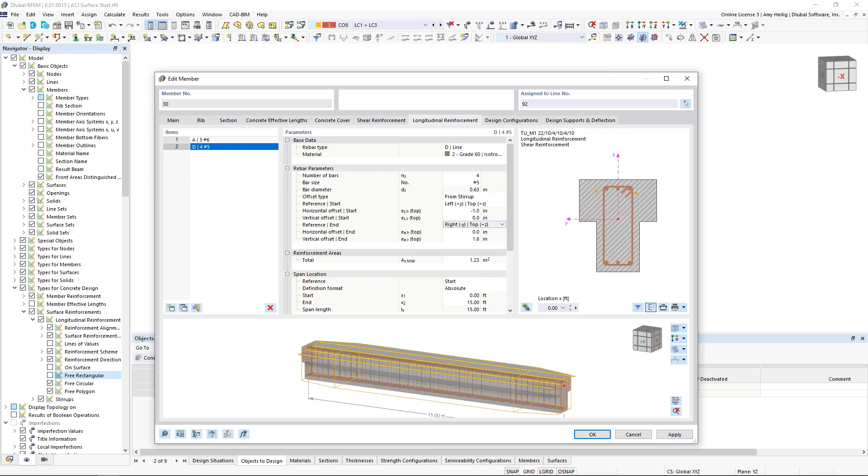This should be right -Y, which we see here, but top negative Z. We want to go ahead and modify this one to a distance of 1 and 0. And if we kind of expand here on the distance to get maybe a larger effective width here for our flanges, this will make a little bit more sense as we see our reinforcement on top. So definitely have to play around with this in order to possibly get those offsets correct with the display options. This will also be applied along the full length of the member here.

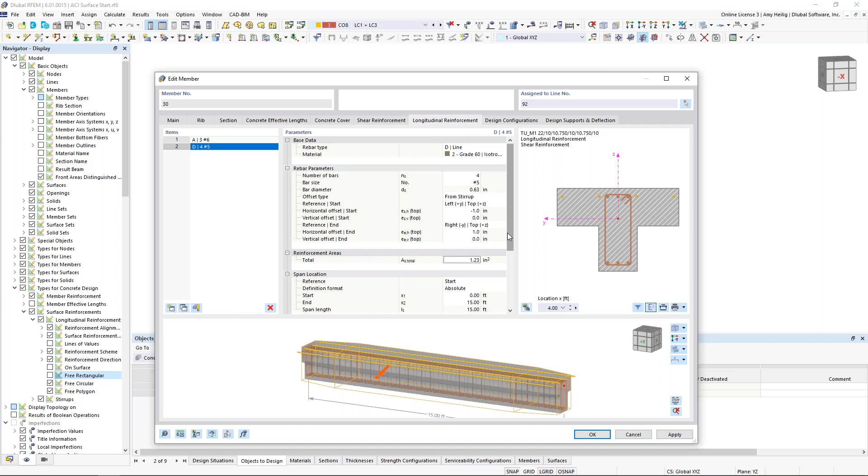Okay, so design configurations, we've already covered. The design supports. Again, I had mentioned if we do nothing within this particular tab, the program will just treat it as supported at both the member start and the member end. Perhaps we'd want to take into consideration the fact that this rib is framing into the column. So we'd want to set those design supports here. But for our example today, we'll go ahead and leave that empty. Now we should see the reinforcement drawn graphically here within the model.

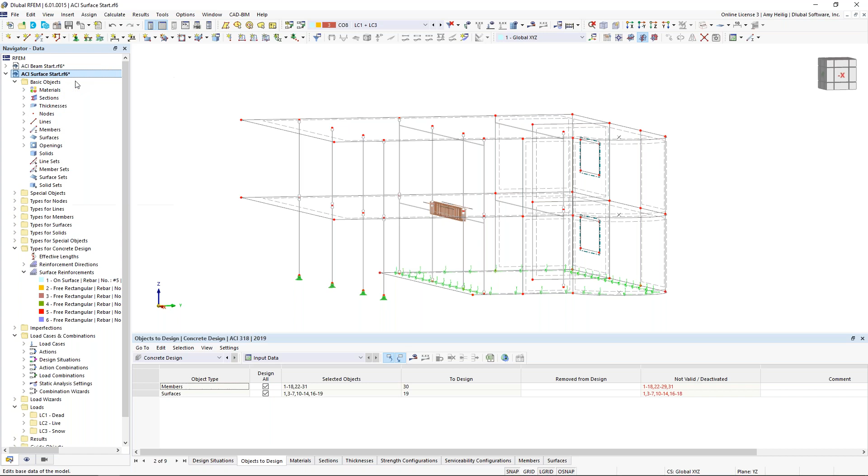Okay, the final thing to do is to set the reinforcement for some of the columns. And for this, I want to go back to my navigator here. And I'm going to right click to visit that base data. So if you remember when we began our example, we can revisit this dialog box here. And under these settings and options, I can activate what's called member representatives. Well, up pops a new tab up here at the top, and what the program has the ability to do is to group together members based on similar materials, sections, lengths, and so on.

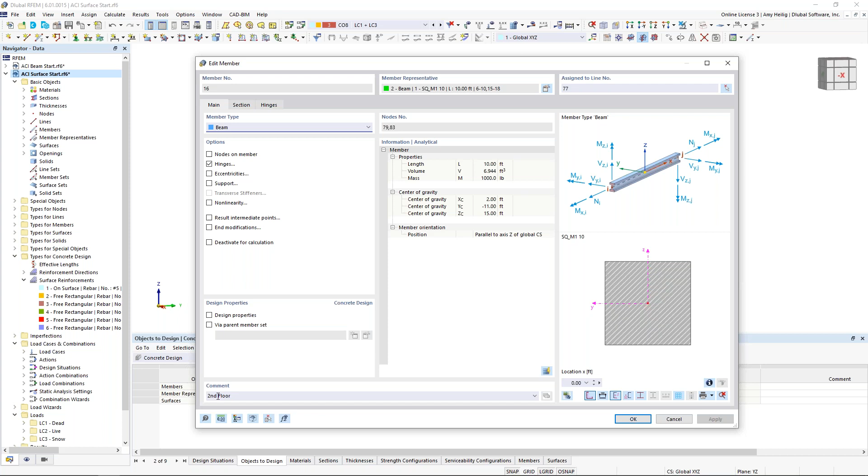I've also activated comments here. So what we'll see when we click OK is a general color coding here of all of those elements grouped together that have those similarities. Now, the columns at the first floor are actually identical to the columns at the second floor. So how I differentiated them is just to simply type in this comment down here at the bottom for those members, second floor, and then automatically the program will place them into a different member representative group. And we can see this denoted by this green color.

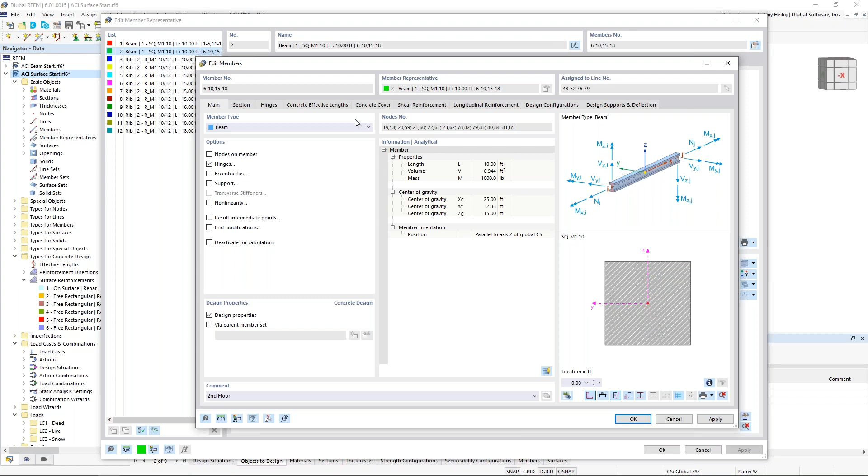So what I can do is to double click on the green color itself, and up pops all of our member representatives. So we'd like to define the reinforcement for the columns. Well, currently members are listed here, and I'm going to go into the edit settings. And I have the design properties turned off, so we're going to turn those on. Now, I'm not going to define the reinforcement here because if I do so, I'm actually defining that individually for each member. Rather, when I click OK, you'll notice that I'm still within the member representatives, but now I have the exact same tabs available to me here. Why this is beneficial: if I go into my member representatives and make a quick change to the reinforcement, that's going to update all of my members that are grouped together.

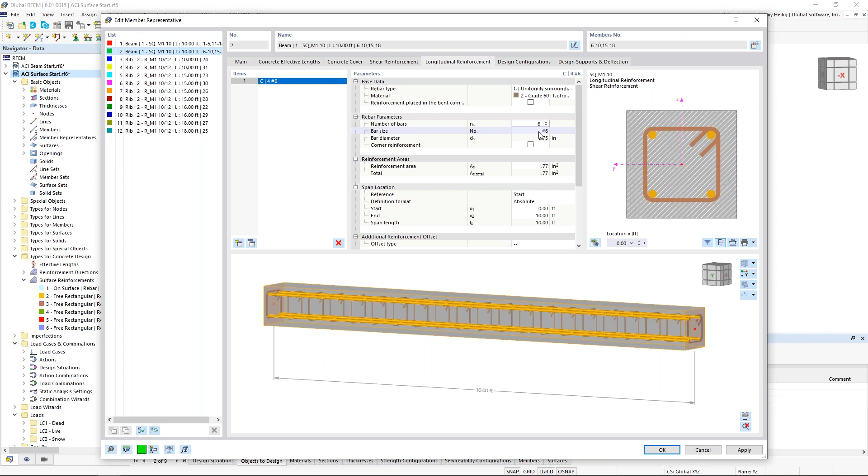So once again, we will visit the concrete cover, 1.5 inches, the shear reinforcement. We want to modify this here. We'll just go ahead and change the spacing to every 6 inches, 0.5 feet. We see our picture update here. The longitudinal reinforcement, we're going to use our drop-down box to choose uniformly surrounding. And we're going to choose 8 number 6 bars here. We can see again, the picture updates accordingly. These are applied to the full length of the member. I click OK, and what we should see now is all of our reinforcement for every one of those columns at our second floor.

So now that we have defined the reinforcement for the surface, for this rib element, for the columns, let us move into running the calculation for both the analysis and the design. So remember, we want to utilize this drop-down box here to visit our concrete design add-on for the input data. LRFD, our factored load combinations, are going to be set according to the strength design. Our unfactored ASD load combinations are set according to the serviceability design.

The objects to design. Well, we have a lot of red elements here, and that is just simply because we have not defined the design properties. I didn't turn on that checkbox. I didn't set the reinforcement. So therefore, we're going to get errors if we try and design everything within the model. So rather, let us turn off these checkboxes here, and I'm going to graphically select surface number 19, and then I'm also going to graphically select my rib element here.

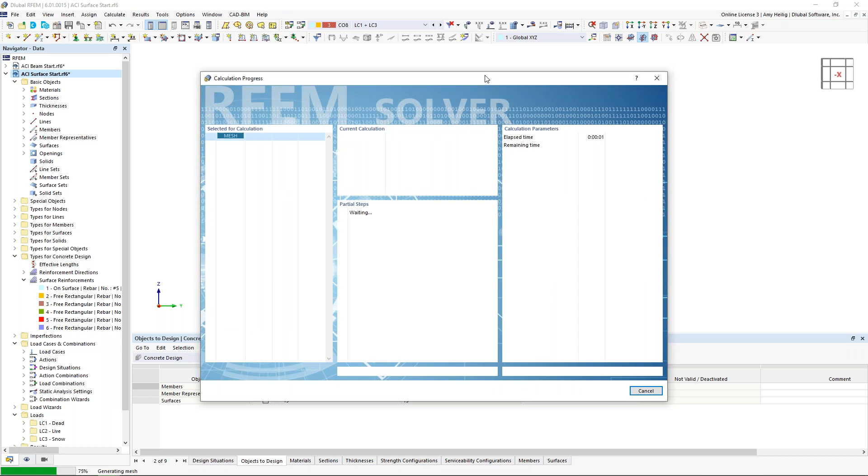And I can also utilize my selection box here to choose all of my columns at the second floor, and I click OK. So now only the relevant members and surfaces will be designed here. The rest of these tabs down at the bottom, we discussed that is just a little bit of repetitive information, nothing to do further, and we will begin the calculation.

So new within RFEM is utilizing the multi-core processor within your computer. Notice that these load combinations, both the factored and the unfactored, are going to solve at the same time, even for these larger models such as this building. Previously in RFEM 5, we had one solve after the other. So these are all complete.

Now notice under the concrete, we have to solve again all of the unfactored load combinations. And the reason for this is, remember, we talked about the effective moment of inertia, I sub E, and that is related to the ACI table 24235. The program automatically calculates that stiffness reduction to be considered for the serviceability deflection checks. So that's why we're seeing those load combinations listed again here.

Now, the final progress bar is just going to be showing us how all of this information is compiled into the table format as well as the graphical format here. So this should solve in just a couple more seconds, and we will be back in RFEM with the results.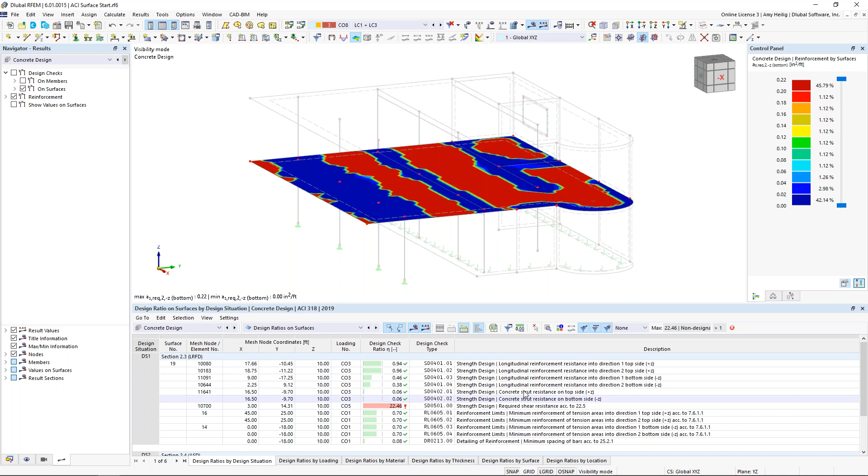Similarly with the members, we have the results available to us in the table format. So let me cancel my visibility mode here. And let us move to our drop-down that shows us the design ratios on the members. So currently we're viewing this tab, design ratios by member.

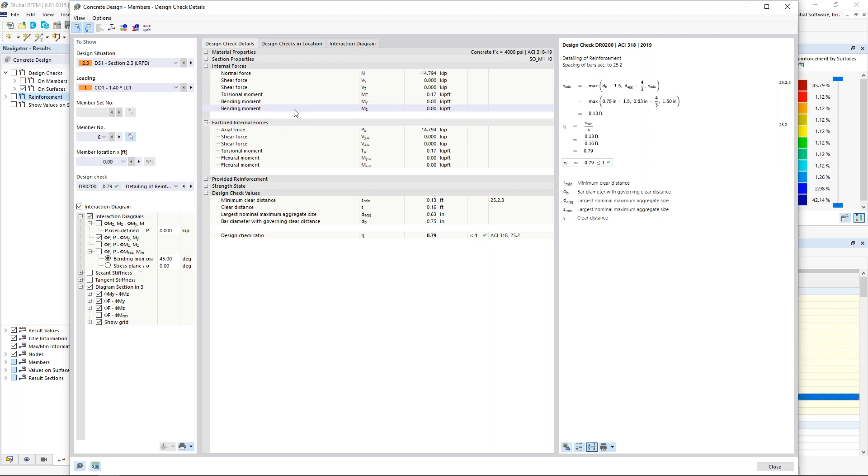Notice that when I click in here, we're shown exactly where that controlling internal force is for this particular column. I'm not going to spend too much time going over the results because we've already seen this with example 1, but with our columns, what might be interesting to us is this new feature here within RFEM 6 for our interaction diagram. So this was long awaited, and we're very happy to present this now because we will see the interaction diagram available to us with this new tab and the 3D view here.

So we can view all of the values within table format, but we can also see where exactly we land within this interaction diagram for this particular member at this X location. We can add this information to our printout report, so very powerful there as well. And of course, we have our design check ratios, our reinforcement that can all be shown graphically for the members that we covered in the first example.

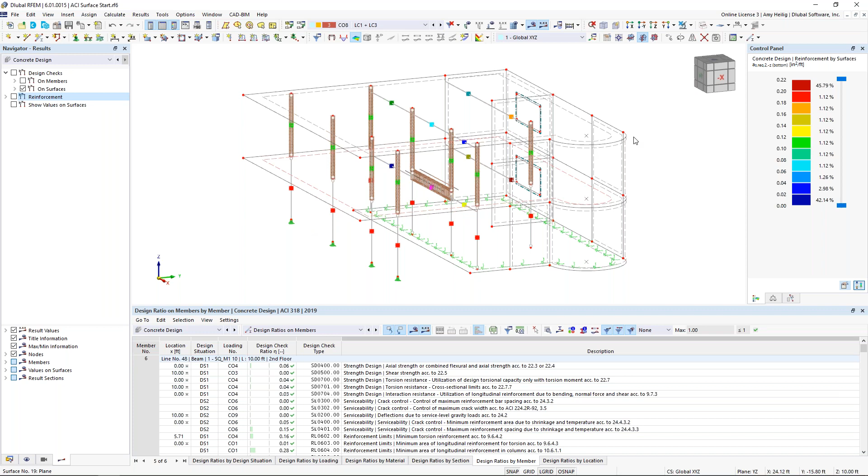So the final thing to cover is just a quick few options with the printout report. What I'll do is create a visibility here for my surface, and I want to hide these hidden objects in the background. I'm also going to adjust my view to the reverse Z direction. For my reinforcement, I want to show all 4 options here for the required reinforcement in my printout report. So the first thing I'll need to do is actually generate the printout report itself.

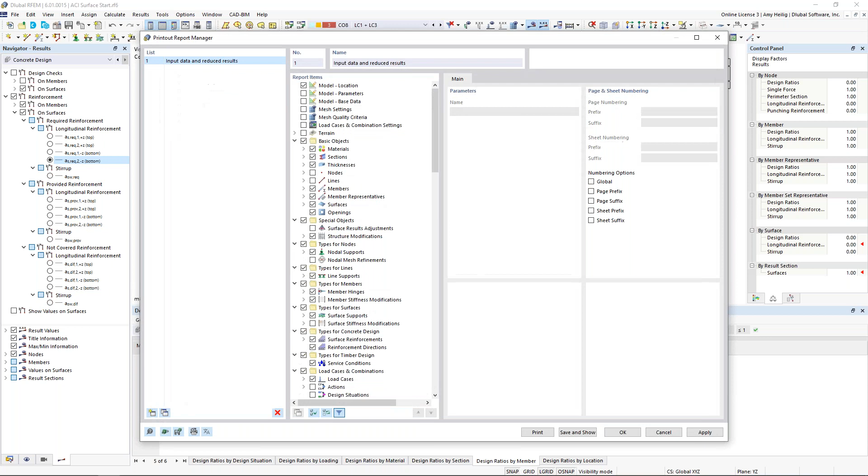Up here in our toolbar, we can choose New Printout Report, and we can see all of the various settings we can turn on and off within the model. Now we also have some saved templates here, so you can load one of those saved templates, or you can create your own. We'll go ahead and work with template number 1, input data and reduced results. So I click OK, I click OK once again. So that printout report is now created in the background.

For my graphics, I'm going to choose my drop-down option here to print the graphics to the printout report. What we'll notice is that I can set this to the full page height, and I've set this to window filling so that it is nice and zoomed in here. And I don't want to just print this view, but I want to take advantage of what's called multi-print. So when I select this option, I can now visit this tab up here for my concrete add-on.

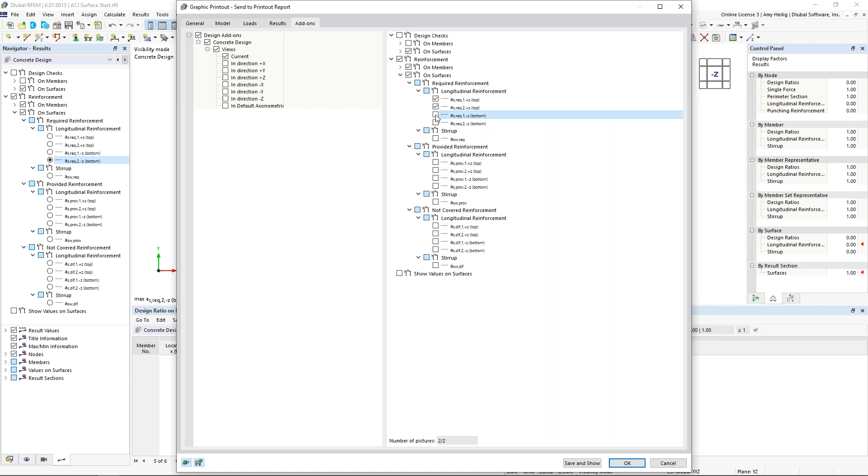Now all of the various options available to me here are exactly what we have available in RFEM that we covered. So what I'd like to do is activate for my printout the required reinforcement in both directions for the top and the bottom. So I click OK, and then what I should see down in the lower left-hand corner is the progress bar that has now added that to the printout report.

So if I go back to my navigator here, I can find that printout report available to me. I can double click on it, and it should go ahead and compile all of those results. We can see our progress bar here to open up the printout report in a separate application. So we can see that application load, and I'm going to collapse our report navigator chapters just so it's a little less overwhelming on the left-hand side.

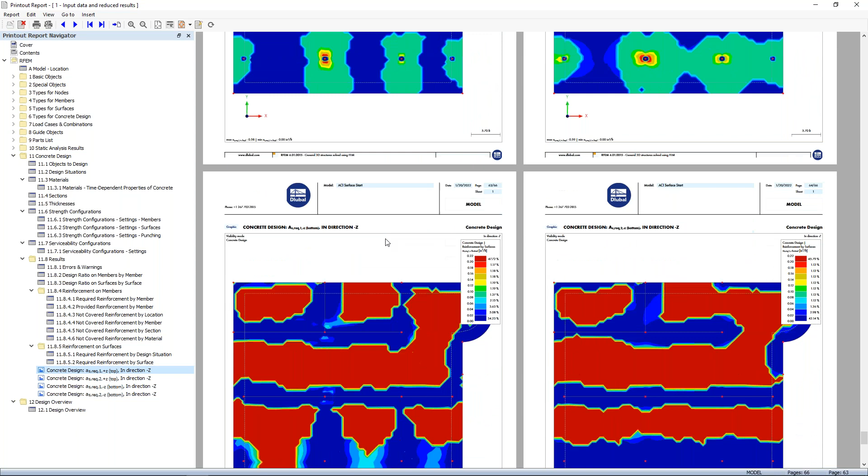This is going to show us, and I can zoom in here, all of the input data, including the results for our structure. But down here at the bottom are those 4 pictures that I just printed off based on that multi-print option. Now what's really powerful is that if I make any changes to this model, the program will automatically update these pictures, so we don't need to go in and print them again.

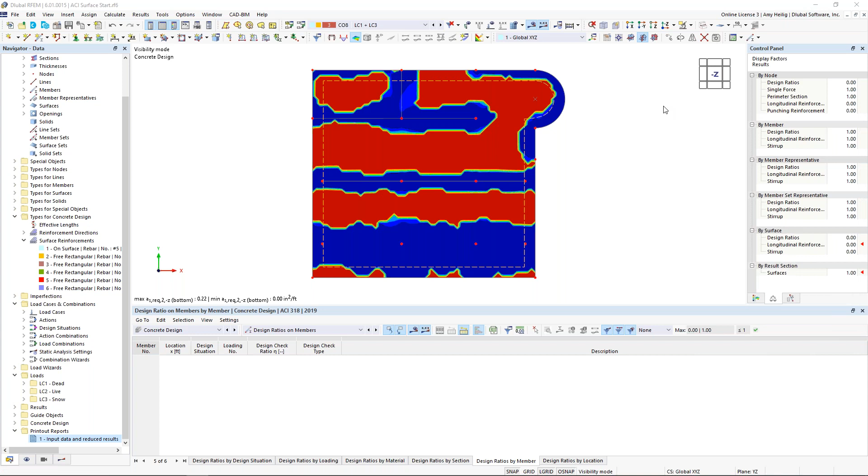So once these pictures have been defined, what I can do here is just drag this printout report to my other monitor, because we can work concurrently in the program at the same time. So let me cancel out this visibility mode, and I'm going to go back to my results here, turn off my surface, and select only my rib member, and create a visibility by the selected objects. Additionally, I'm going to turn off that member reinforcement, and we will choose our view in the Y direction. So just a simple wireframe view of that member.

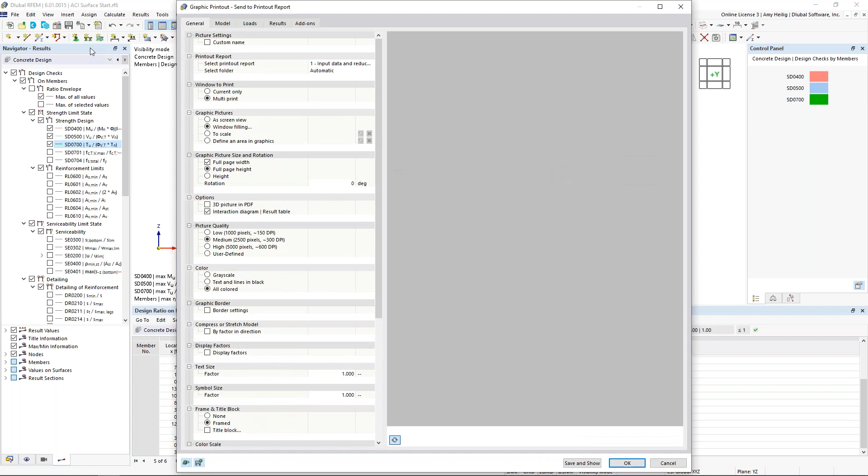Back under my results, I'm going to take a look at the design check ratios for this member. And I don't want the max, but rather I'm going to overlay here several of the design checks. You can see again these color codings will show me exactly which design check ratios I'm looking at. So let us print this off to our printout report as well. I go up here to choose print graphics to printout report, and this time though we want to view the current view only. And I want to also modify this, not to full page height, but we'll choose 50% of the height.

Once I have these settings correct, I click OK. I'll drag this printout report over to the monitor so you all can see it too. We now have this picture automatically added to the printout report.

We also can right click on any one of these folders to create a child folder. Perhaps we want to rename this to Surface Graphics for a little bit better organization. I can right click under Concrete Design, create a child folder again, and we'll call this Member Graphics.

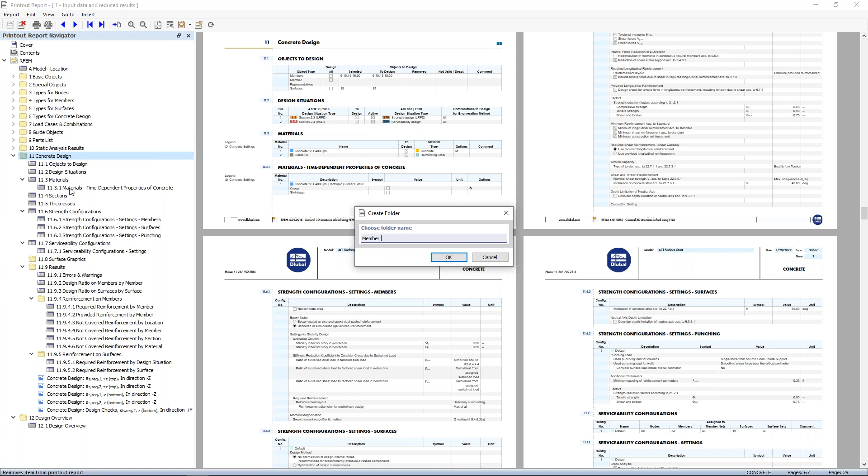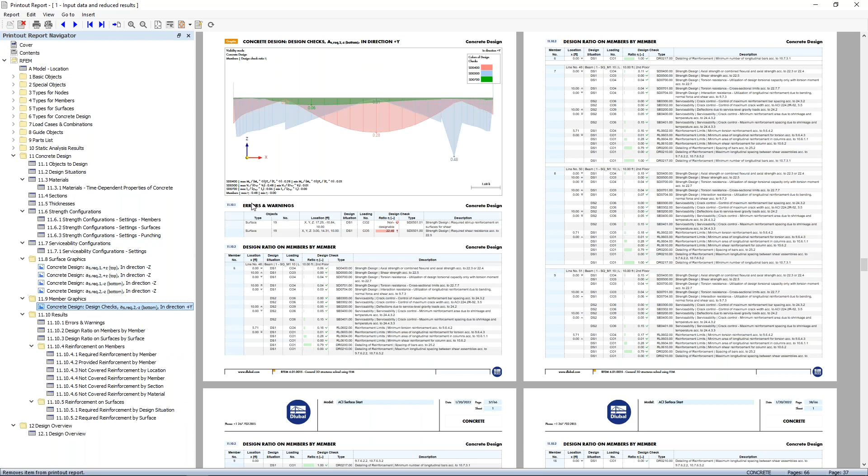I click OK, and I can use my Shift key to select all 4 of my surface options here. I can drag and drop them into that new child folder, and the report will automatically update. For that rib picture, I can drag and drop that one into Member Graphics, and we can see it's now added to that portion of the printout report.

All of this information you can edit, including the logo, the cover page. We can modify this cover picture. Once you have the information set the way you like it, definitely save it as a template, and you can use that for any future models within Rfem. So, extremely powerful printout report. We did a lot of great changes with this new version, so certainly take a look at this.

Okay, so we are ending the hour today, so I'm going to go back to the webinar. One thing I just quickly wanted to mention before concluding the presentation is some upcoming developments.

Looking at the ACI, I had already mentioned that punching shear should be ready in the next several weeks, so that's something to look forward to. Chapter 18 for seismic design - we currently have reinforcement detailing available, but we're going to continue expanding on these topics, including information like strong column, weak beam. The 2014 standard should be implemented relatively soon as well.

Rfem 6 was completely rewritten in an updated programming language, so we initially started off with the most recent standard, the 2019. We'll go ahead and add in the older version as well. Nonlinear concrete design is also in development - this can actually consider the true cracked cross-sectional properties for members and surfaces for that nonlinear design.

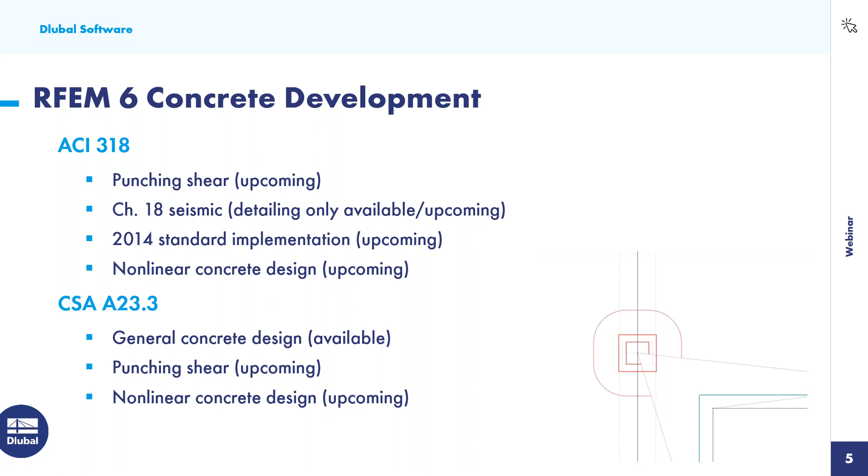CSA A23.3 - everything that you saw today is also available for the Canadian standards. It's an identical workflow; we're just doing the design according to the CSA. The punching shear should also be available soon according to the Canadian standards, and nonlinear concrete design as well. So these are just some developments in the near future. Of course, we have longer term developments as well that are just a little bit further off.